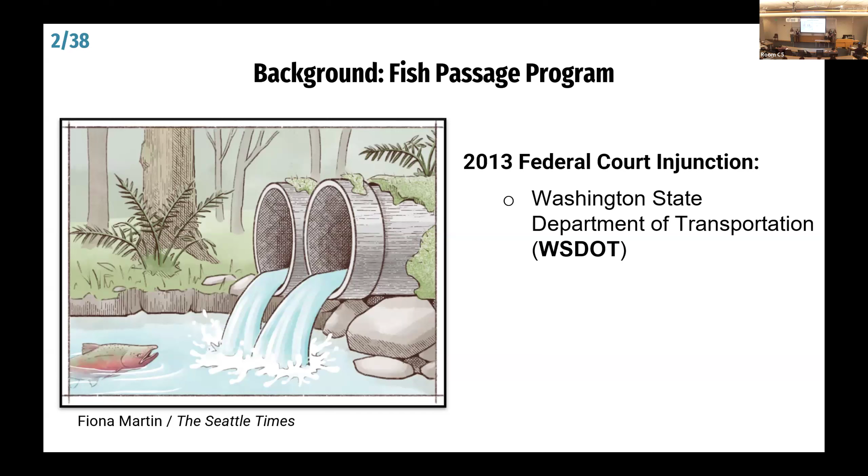A federal judge agreed with the tribes, and as such, state agencies such as the Washington State Department of Transportation are responsible for correcting these barriers caused by their infrastructure.

Although King County does not fall under that state agency umbrella, they are taking a proactive approach. They have developed a fish passage inventory that categorizes fish passage blockages by how much habitat would be opened up if corrected. This has led to 60 high priority barriers that, if corrected, would open up over 300 miles of habitat for salmon.

As for our specific project, we are working on a culvert in South King County, right next to Enumclaw, Washington. The culvert runs next to State Route 410 and underneath the Foothills Trail, which runs parallel to Boise Creek. Our culvert allows our tributary to pass underneath the Foothills Trail into Boise Creek.

A little site history, because it's relevant for our project as a fish passage project: our tributary actually runs in the channel where Boise Creek used to run. But in the early 1900s, when they were constructing the railroad and State Route 410, Boise Creek was straightened and moved to run between those two raised roadways.

As a result, you get a channel that would naturally be moving and have diversity in velocity and water depth, depending on where you are in the stream, turned into a channel that's straightened and more artificial. This has a lot of impacts on fish habitat, especially salmon habitat, because a naturally meandering stream would typically have areas of lower velocity that serve as refuge for juvenile salmon. Creating an artificial straightened channel loses a lot of those habitat complexity features.

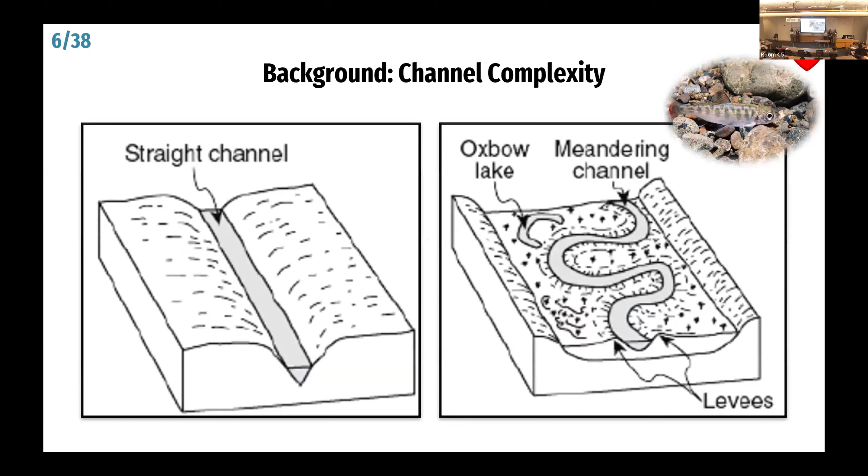We had the opportunity to do a site visit this past fall, and it really came down to three main reasons why this culvert is not fish passable.

The first reason is that it's a perched culvert. When we went out for our field visit, we measured the distance from the bottom of the outlet to the top of the water surface, and it was about 1.3 feet.

The second reason is that it has a very high slope. From the inlet to the outlet, it's about a 4.7% slope, which leads to really fast velocities going through our culvert. The third reason is that the outlet comes out into a really shallow part of the stream, so the fish jumping mechanics from the shallow stream bed up into the culvert is really challenging.

Going back into our model location, we decided to model this specific portion of the stream, which you'll see in our HEC-RAS model right here.

You may notice that our stream is at the downstream-most section because the flow travels south in that direction. You may also be seeing a little gray box right around here.

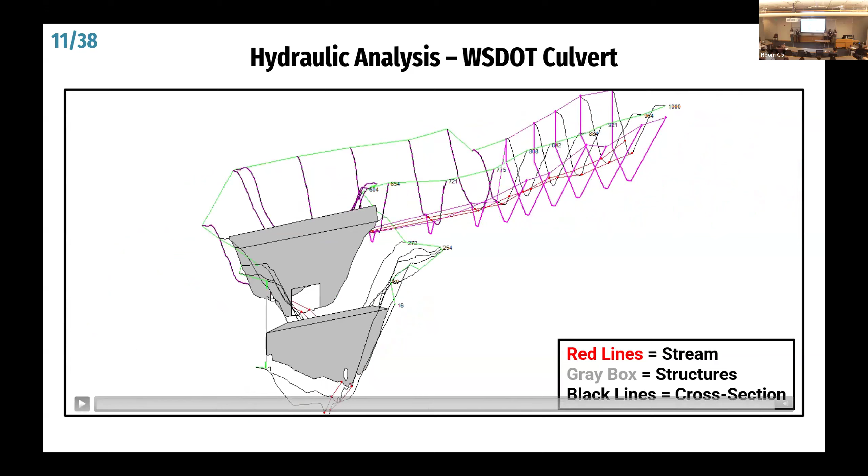All those cross sections are doing are just making cuts along the stream so that we know how the stream bed looks throughout the channel, and that way when we run the model through it, we know how the water is going through it.

You can see WSDOT just upstream of ours.

In order to do our designs, we had to take a bankfull width measurement, which is the width of the bank when the bank is full. That's really important for us because anything we design is going to affect how the water flows through it.

In that case, we need to make sure the bankfull width is wide enough to facilitate those high flows. So when we went onto the site, we got a bankfull width measurement of around 5.1 feet.

But we upgraded that to around 18 feet, which may seem a bit high, but that actually takes into account a lot of climate change that will happen in the future, and also tribe preferences.

So we have our fish passage program background, our problem statement, our bankfull width, and some site history. The last thing we need to finish our model is to actually figure out how much water is going through our culvert.

As you can see on this slide, in blue over here is a basin delineation which WSDOT performed. We were lucky enough to have access to that information, so they performed a basin delineation and calculated flows.

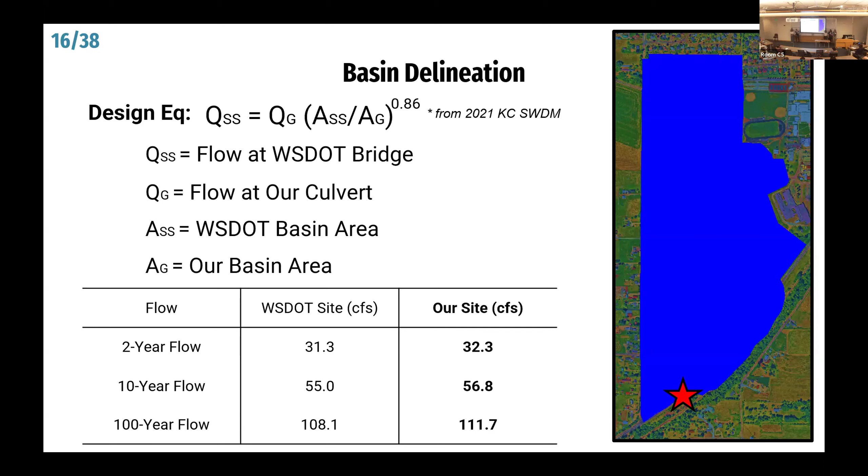So to address this, we proposed 3 alternatives to our liaisons at King County: a pipe arch, a bridge, and a box culvert.

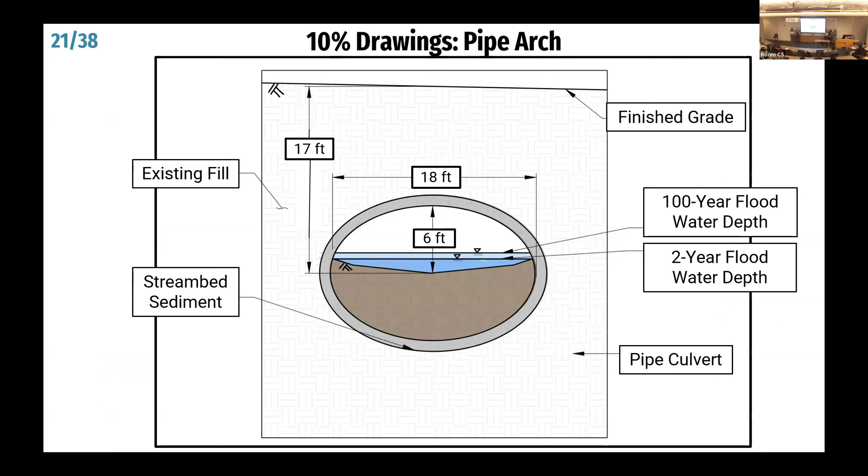The first alternative was the pipe arch, a concrete pipe arch. Here you can see our 10% conceptual design. Note the 18-foot width to accommodate the bankfull width we calculated, and the 6-foot height from the stream bed to the top of the structure to give sufficient freeboard during the 100-year flow.

The great thing about having our HEC-RAS model is once developed for our stream, we can put in proposed structures where our current culvert is. This shows how the flows would move through a structure with those dimensions if we were to construct it. Here's our pipe arch, showing the water surface elevation for that 100-year flow.

Finally, we have our 4-sided concrete box culvert. Here are the HEC-RAS results. We actually used an 18-foot width for this, similar to the pipe arch instead of the 20-foot bridge.

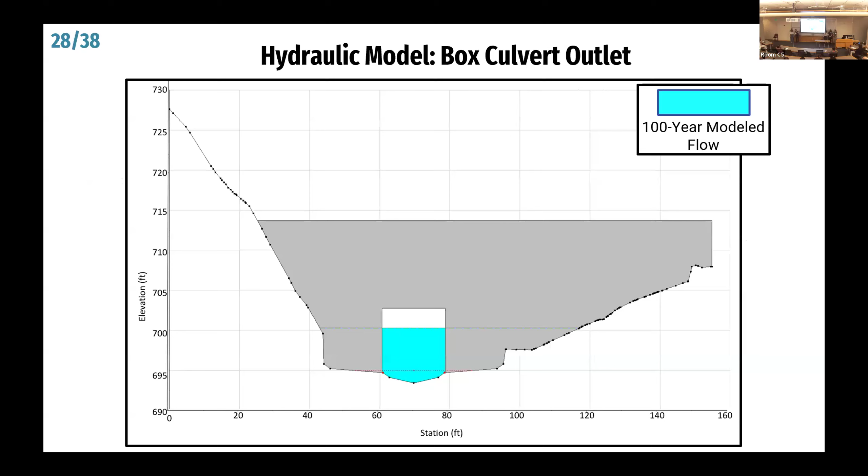Once we had those 3 alternatives developed, we wanted to evaluate them using an evaluation matrix. We took 9 different categories that were relevant priorities for our project and weighted them based on importance. Then we scored all 3 alternatives both qualitatively and quantitatively, as well as an as-is option to give us a baseline.

When we did this, we found that the box culvert and the bridge came out ahead with very similar scores. The box culvert came in just a few points ahead of the bridge, so we went to King County to discuss.

While the box culvert and the bridge had very similar results, we chose the box culvert. The reasoning is largely certainty within the cost estimate. While both alternatives require structural analysis, there hasn't been a geotechnical analysis completed at the site, so there's a lot of variability, for example within the foundation design and structural design, and the bridge would have more variability than the box culvert. Since there's more uncertainty there, we went with the box culvert.

With that decision, we're able to move on with our 30% design. On screen you can see the existing plan, and one thing to note here is this temporary stream diversion.

You may be wondering, what is a temporary stream diversion? When you're doing construction in a stream, you need to get that water out so construction workers don't have to get wet, because it wouldn't be very fun for them. However, this is a fish passage stream, so you may be wondering, what happens to the fish?

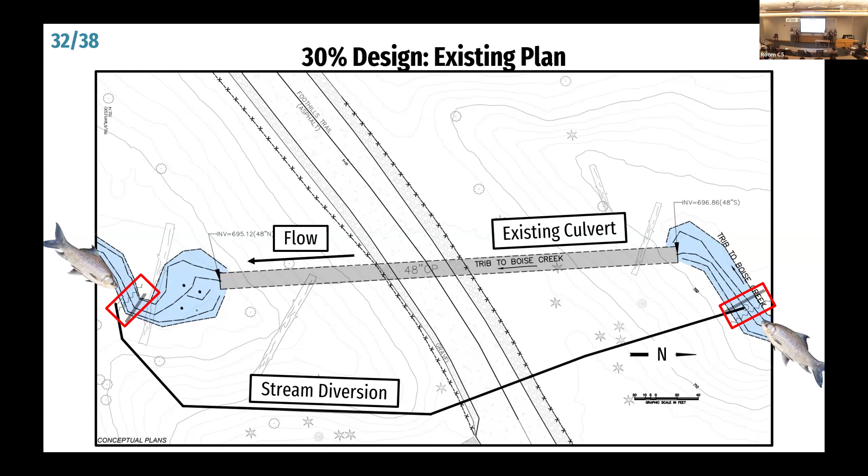Pretty much, we just put up nets, so they can't get sucked up into the pipe, since they wouldn't like that. They hang out there for the duration of construction, which likely won't be very long.

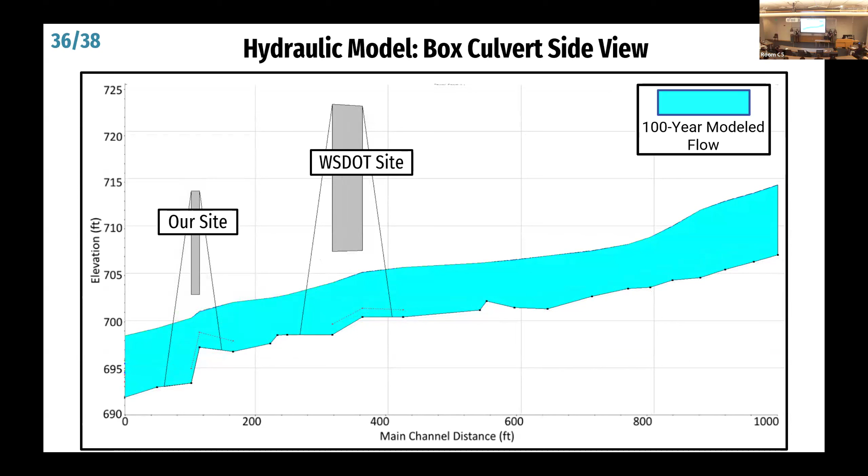So now returning to our hydraulic model, we can really see how the flows would be affected by this new structure. Here is the side view of our proposed conditions. Once again, you can see those two hydraulic drops. When we transition to the structure with the wider width, those two drops disappear and the flow moves much smoother through the culvert.

Thank you so much. Any questions? You can just put up your hands.

I have a quick question regarding opportunities for collaboration between King County and WSDOT. You mentioned they had another project going on very close to your site. Was this something you saw as a key challenge in your project? I know you had to consider a lot of the implications of their project in what you were conducting. Did you see an opportunity to collaborate with them, or are you just curious if you think that?

So your question was whether we were able to use this project as an opportunity to collaborate with WSDOT, since their project was right upstream from ours. We saw it as a really great opportunity and a benefit to us, because they had already completed their report for their preliminary hydraulic design. There was actually a lot of really helpful information about our tributary in that report. King County was also in communication with WSDOT, so we got some information from them that we couldn't have gotten otherwise. It was really helpful to have that as a resource for us.

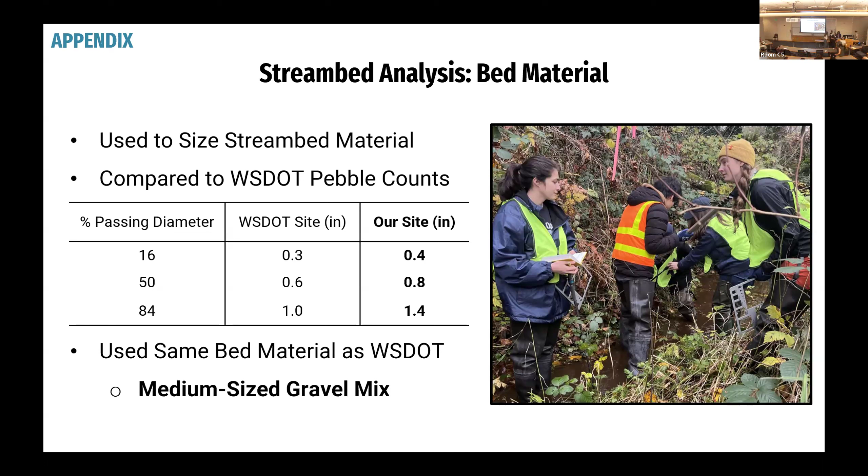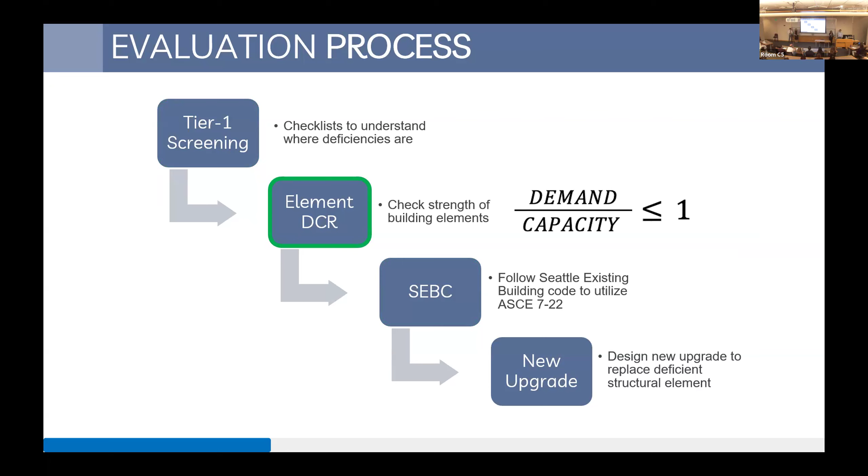We also learned that under the Seattle existing building code, we are permitted to use different design standards apart from ASCE 41. Therefore, our team utilized the ASCE 7-22 standards to design the final upgrades for each building within our scope.

To elaborate more on what our team did during the Tier 1 screening process, we completed a series of checklists designed for different performance levels, such as immediate occupancy and life safety. Both of these performance levels ensure that the North Service Center sustains minimal damage during an earthquake, while protecting occupants inside and outside of the building and remains fully functional immediately afterwards.

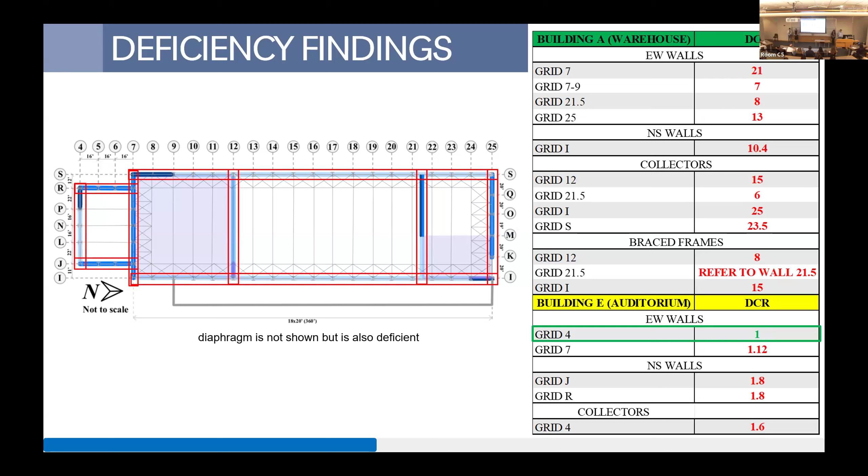Diving deeper into the areas of concern in the auditorium, Team CE 25.5 has identified significant deficiencies within the lateral support system. This includes in-plane and out-of-plane seismic forces acting on the existing shear walls. Currently, there are only 2 shear walls within the auditorium, one on the south wall and one on the west wall. The south shear wall is made up of reinforced concrete and has a demand versus capacity ratio of 1, making this wall compliant. In contrast, the west shear wall is made up of CMU, which stands for concrete masonry units, and has a demand versus capacity ratio of 1.8, making this wall insufficient and will likely be compromised during a seismic event.

Now I'll pass it back to Paula, who will describe a deficiency within the warehouse. Thanks, Elaine. In the event of an earthquake going in the east-west direction, the shear wall at grid 7 is subjected to seismic forces from both buildings. Given the extensive tributary width coming from the warehouse, the shear walls at grid 7 and grid 25 may not provide sufficient lateral resistance. To address this deficiency, our team has developed an upgrade to propose to Seattle City Light, which we will introduce later in the following slides.

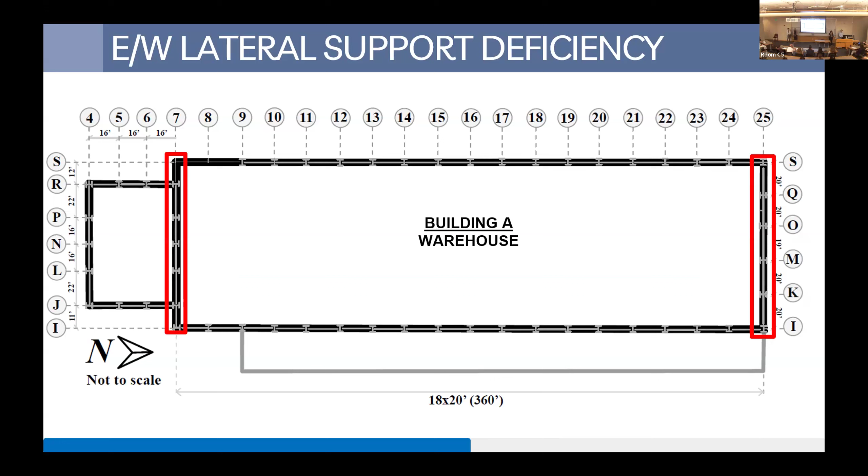But for now, I'm going to pass it to Harold to share another deficiency we found at the warehouse. Thank you, Paula. Continuing the conversation on the warehouse, our team identified two major deficiencies in the diaphragm. For clarification, a diaphragm is a structural component which is part of a building, which can either be the roof or floor system.

In the case of our warehouse, we analyzed the steel deck diaphragm, which is our roof system. The first major deficiency our team identified is insufficient welds. From our site visit and the building plans, we found the existing welds from the decking to the trusses, and the longitudinal seam welds, to be insufficient from our analysis and inspection. In general, these welds transfer forces and help connect existing members.

Thank you, Harold. Once the team was able to understand all of the deficiencies throughout the North Service Center, the originally proposed approach of utilizing ASCE 41-23 to conduct a retrofit appeared problematic. The associated costs and level of effort required to follow this method greatly exceeded our initial expectations. To lower these costs and maintain project efficiencies, the team wanted to explore alternative methods.

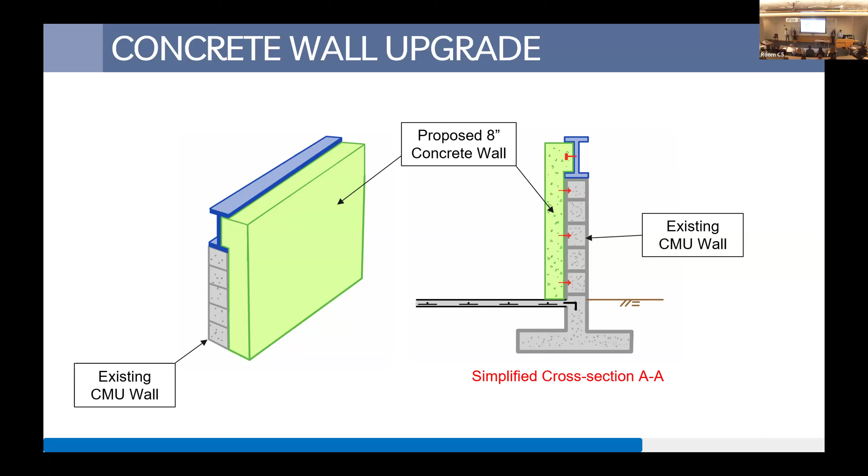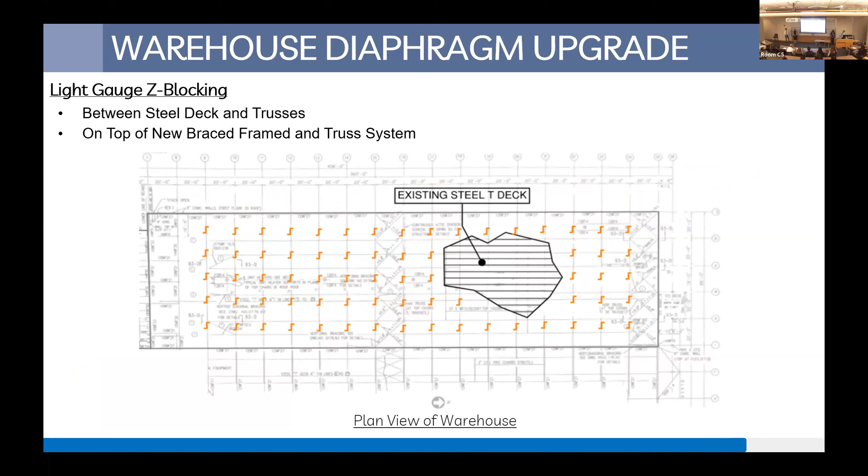I'm going to pass it to Harold to share another upgrade for the warehouse. Thank you, Paula. One of the major upgrades the team proposed for the diaphragm of the warehouse is the addition of light gauge Z blocking. As I mentioned earlier, shear transfer and insufficient walls are issues that need to be addressed. The proposed upgrade, shown in orange, will be located between the existing decking and trusses, and also at the proposed new truss and brace frame configuration that Paula just mentioned.

The connection is as follows: the top of the Z blockings will be drilled underneath the steel deck with Tek screws, and the bottom of the Z blockings will be connected with powder actuated fasteners to the top chord of the existing trusses. The proposed upgrade improves the connection and allows lateral forces to effectively transfer from the decking to the overall lateral resisting elements, which leads me to the full breakdown of all our proposed upgrades for both the warehouse and auditorium.

To further quantify each upgrade, here are all of our concrete upgrades. Following all the concrete, here are all of our diaphragm upgrades, which include Tek screws, Z blocking, and C channels. And finally, here are all of our steel upgrades, which include brace frames with dampers and ones without.

All of these upgrades follow the general procedure of doing a tier 1 screening process, a DCR analysis using ASCE 41, the use of FEMA to better understand the seismic behavior of a rigid wall flexible diaphragm, and finally using ASCE 7 for our proposed upgrades. I'm passing it on to Helene, who will finish talking about the cost estimate of this project.

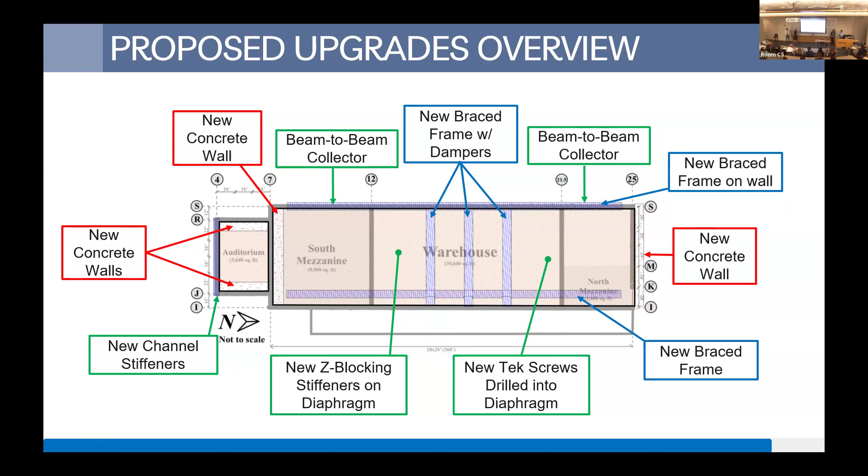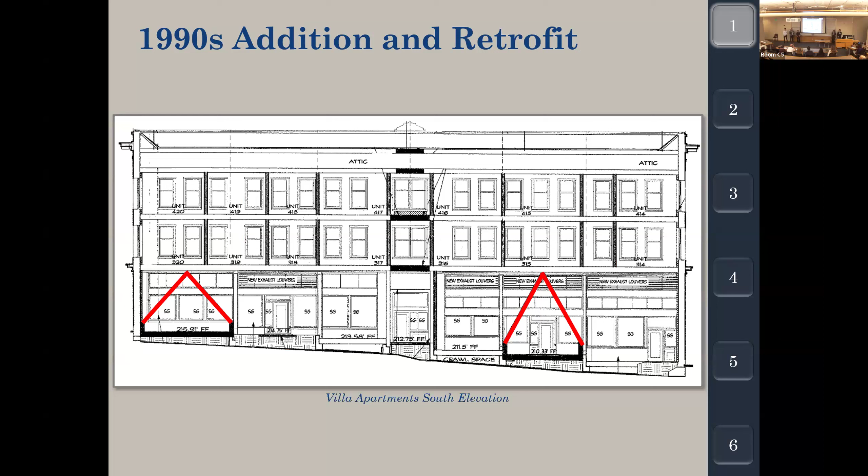In the 1990s, our building got a major addition added on, outlined in red here. It was not part of our project since it's seismically separated from the rest of the building. Alongside this addition, we also had some seismic renovations done, including the addition of two chevron brace frames, as well as wall anchorage and parapet fixing. Now I'll pass it back to Nick to go over our retrofit methods.

Before diving into the specific calculations and design work our team performed, it's important to understand the scale of this problem. The city of Seattle alone has over 1,100 unreinforced masonry buildings, all at risk of damage during a seismic event. Because of this, in 2024 the city of Seattle passed Resolution 32033, which created a program to incentivize the retrofitting of unreinforced masonry buildings.

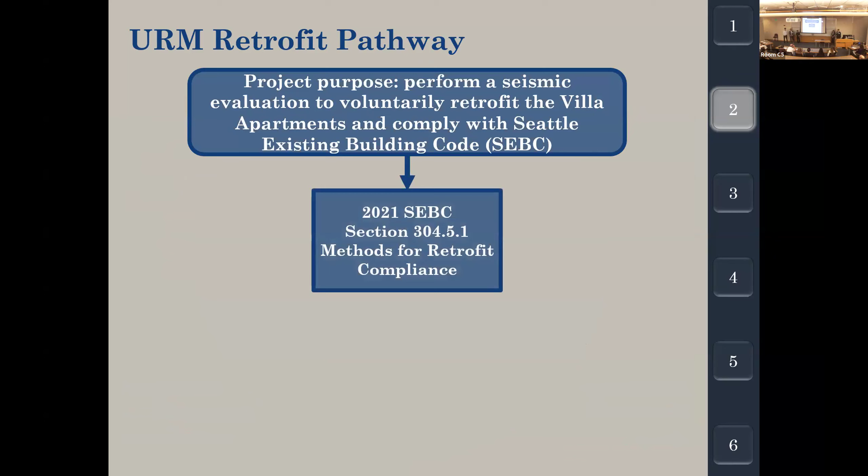Generally speaking, when you retrofit an unreinforced masonry building, you protect life safety, preserve historical landmarks, minimize financial strain on communities like those in our apartments, and improve earthquake resilience. For our project specifically, the purpose is to perform a seismic evaluation to voluntarily retrofit the Villa Apartments and comply with Seattle Existing Building Code. This led us to use the 2021 Seattle Existing Building Code, Section 304.5.1 methods for retrofit compliance.

Within these methods there are three sub-items, as seen on the screen. Initially our team looked into item 3, for existing retrofits, where we aimed to qualify the 1990s retrofits as acceptable in today's standards. However, we determined that they were not feasible. Then we looked into item 1, Section 304.4.2, the reduced IBC method, which is a full life safety upgrade of the building. We determined this was too expensive for our client and not feasible. This led us to pursue item 2, the Chapter A6 alternate method.

Chapter A6 is a retrofit method specifically for unreinforced masonry buildings, and this allows us to remain cost-effective by minimizing the required life safety upgrades. This is especially important for us because it allows us to find a design solution that aligns most with our client's goals: remaining cost-effective, limiting tenant displacement to under 12 months, and minimizing the amount of invasive structural replacement. Now I'll pass it to Keon to talk about our first steps.

As Shay and Nick just mentioned, the most preferable retrofit pathway is the alternate method. But before we could begin the qualification process, we had to assess aspects specific to our building, starting with a material analysis, giving us our seismic weight, alongside determining the seismic hazard, giving us the shear forces, both of which were necessary before any further evaluation.

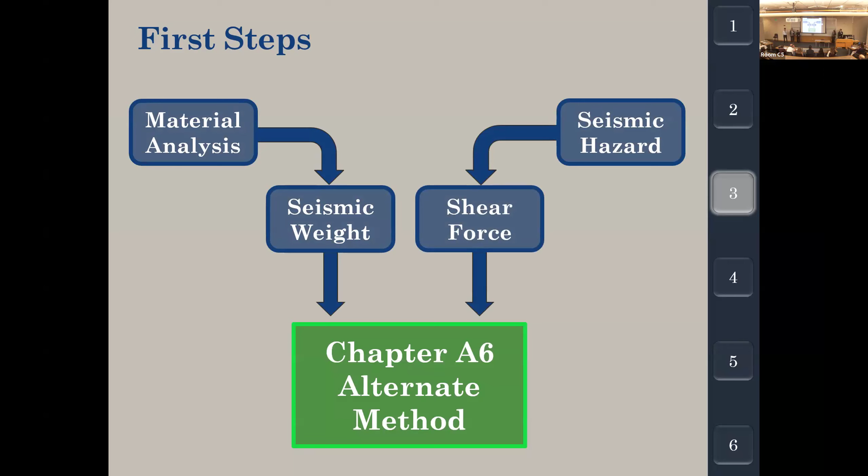So we took those materials and found their unit weights using the appendix of ASCE 7-16, alongside previous projects and other online resources. Now looking at the seismic weight using those unit weights.

For the seismic hazard analysis, we used the ASCE 7-16 hazard tool to get our key seismic design coefficients using soil type C. Since we do not have an official geotech report, our team prescribes that a geotech investigation be done for our site. Since this is also an existing building, Chapter A6 allows us to reduce our seismic forces to 75%. This helped us get started on the building demand calculations: the wall story force and shear.

The wall story forces were calculated for each wall corresponding to each seismic level. To get the wall story shear, we just summed up all the wall story forces at each level. Next, I'll pass it on to Shay, who will be talking about the A6 qualification criteria.

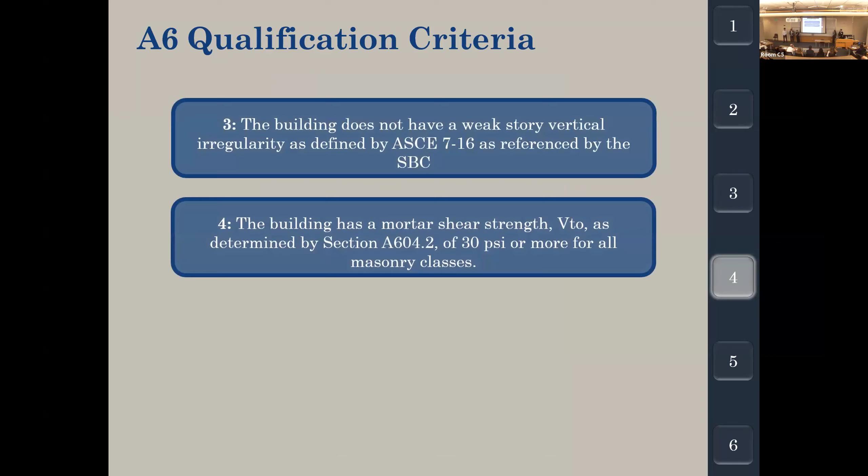A6 provides us with 7 criteria which we must meet in order to retrofit the villa apartments per this method. Of the 7 criteria, criteria 3, 4, and 7 required a bit more work. Criteria 3 has to do with the weak story vertical irregularity in the commercial space of our building. Criteria 4 has to do with the mortar shear strength, which will require out-of-scope testing. Criteria 7 has to do with the way that our masonry walls are responding to seismic forces.

After doing these calculations, we found that we did not meet that 40% rule, thus leading us into our exception. Our exception had us do a masonry analysis via Appendix A1 Special Procedures, in which our first step was to determine which pier failure mode controlled at each level on each side of the building.

The first pier failure mode is sliding failure, which occurs when the lateral forces exceed the frictional resistance built between the brick and the mortar, causing sections of brick to slide against each other like this. The next type of failure was rocking failure, which occurs when the overturning moment from the lateral forces exceeds the self-weight of the building, causing sections of brick to tip back and forth along a single axis like this.

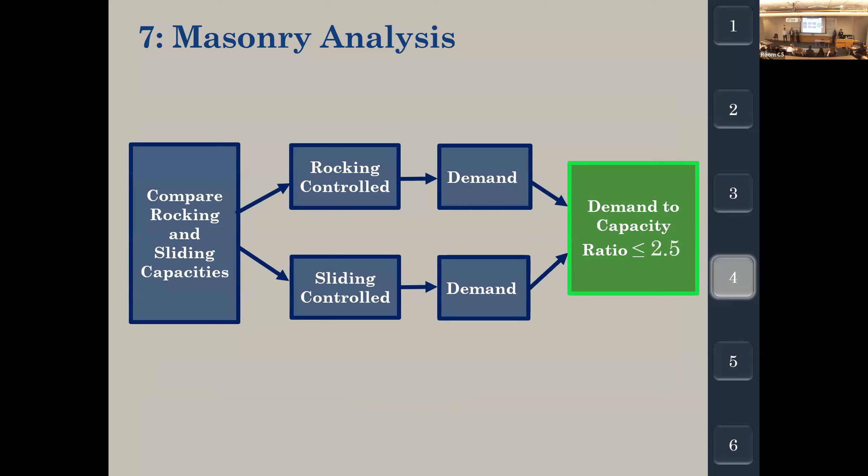Once we figured out which pier failure mode controlled, we were able to use the correct demand and capacity equations. Something important to note here is that A6 allows us to have a demand-to-capacity ratio of up to 2.5, whereas the industry standard is typically 1. This means that our demand can be up to 2.5 times our capacity.

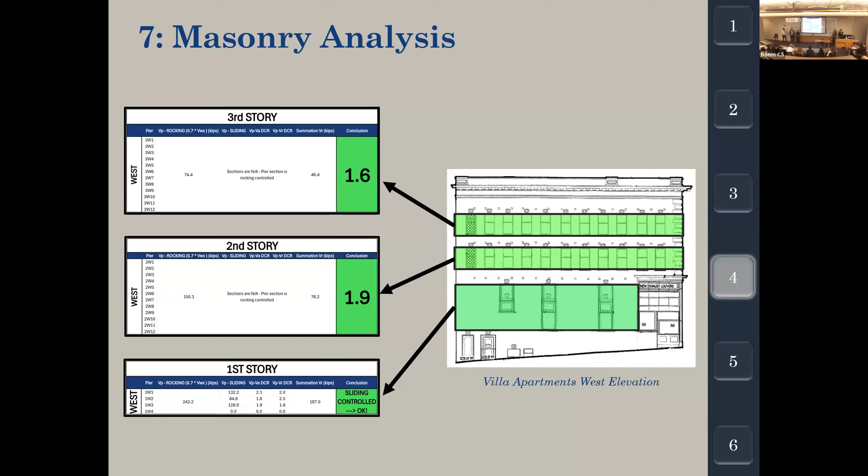Our job was to ensure that these piers could withstand the high demands, and we concluded through our analysis that all pier sections on all four sides of the building were within the 2.5 demand capacity ratio provided by the alternate method, thus concluding our criteria number 7 analysis.

As Shay mentioned earlier, criteria number 3 has to do with a weak story vertical irregularity. Our team determined that the Villa Apartments has a weak story vertical irregularity in the window wall on the south-facing first floor, because the window walls have less strength or stiffness than the masonry walls above them. To analyze this, our team looked at the drift and strength capacities of the wall. Drift is how much the wall moves side to side during an earthquake, and strength is how the wall reacts to seismic forces.

Because the Villa Apartments currently has chevron braces on the south wall installed in the 1990s, our team analyzed these first for their drift and strength capacities and determined that they were both inadequate. As such, we recommend installing new buckling restrained brace frames to make the window wall adequate and remove it from being a weak story vertical irregularity.

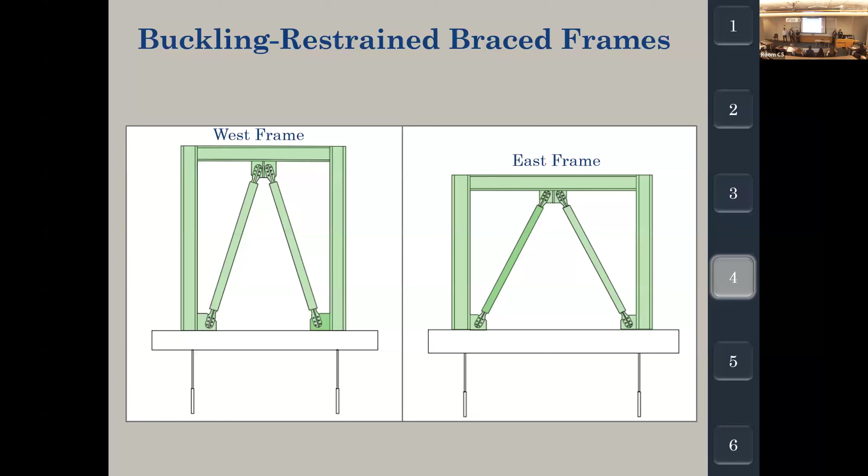We determined that the system was adequate in both drift and strength, which allowed us to finalize our design, as seen above, with accurate member sizes for the beams, columns, and braces, as well as our tentative foundation below. Because the system is adequate in drift and strength, this allowed us to check off criteria number 3 and move into the seismic improvement methods, which Will is going to discuss next.

So the first seismic improvement element outlined by A6 is out-of-plane wall bracing. This is basically used to prevent the walls from collapsing between floors, and can implement use of the bracing shown on the right here.

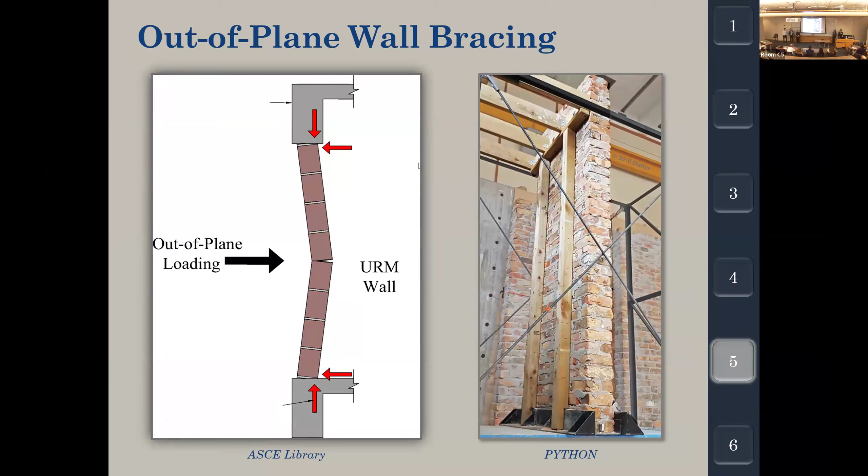Next is the seismic improvement element outlined by A6: wall anchorage. Wall anchorage is basically used to tie the floors to the walls, preventing them from completely separating and collapsing in a seismic event. To evaluate these wall anchors, since they were part of the '98 retrofit, we had to evaluate them for both shear and tension, or in-plane and out-of-plane forces.

Additionally, where we cannot install new anchors, we have to recommend special lateral bracing for areas like the stairway and the elevator shaft.

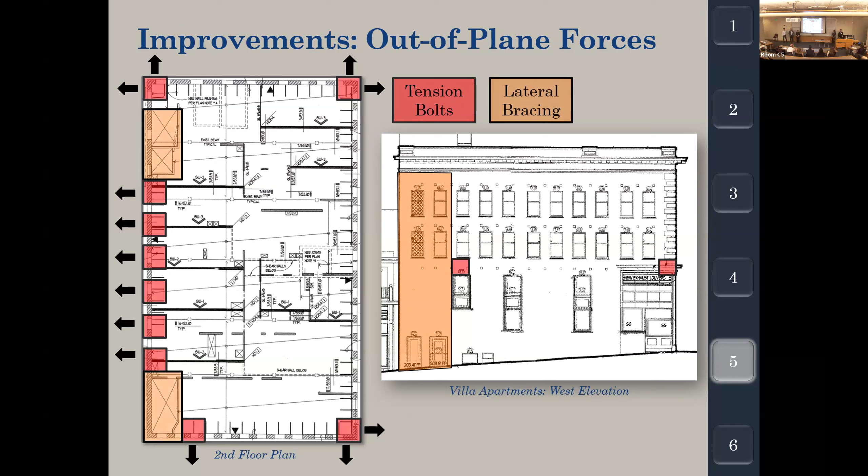Moving into our cost estimate, we broke our cost estimate up into 4 categories: 1 being design fees, 2 being Chapter A6 qualification requirements, 3 seismic improvement methods, and 4 our contingency and overhead. Overall, our total project cost came out to $1.1 million.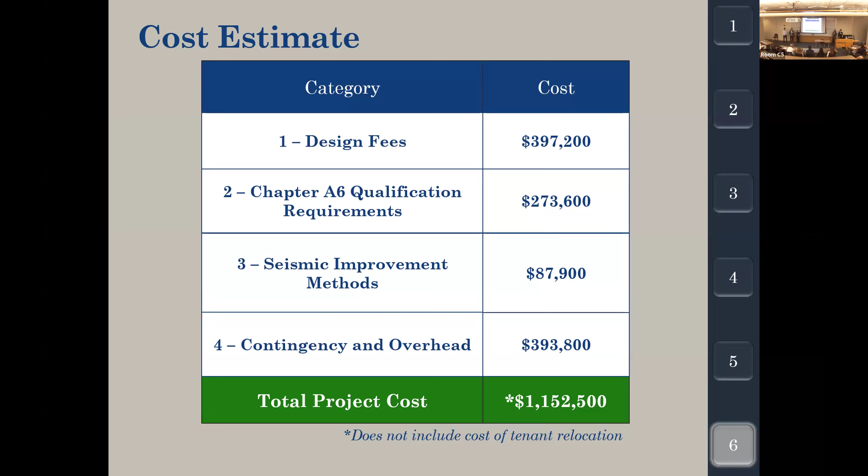Something important to keep in mind here is that A6 is the most cost-effective method in comparison to other retrofit methods, such as substantial alterations. Thus, we believe that our design solutions are most in line with our sponsors' goals. Thank you.

Awesome presentation. Just had a quick question. As a former dirt guy myself, what led you to choose site class C versus site class D, since site class D would give you guys a little more conservative values?

So I'll repeat the question. The question that was asked is, why did we choose site class C? Is that correct? Well, we do not have an official geotech report, like mentioned, so we had to use existing boring logs through our Washington Geological Portal with the advice of a senior geotech from a different company. We were able to look at the soils and came up with the idea that it is soil type C, so we're just basing it off of that. I did repeat that we are recommending a geotech investigation be done for our site, which will also be useful for our finalized foundation design.

Can you explain why you're allowed to get to 250% of your, you can have your demand be 250% more than your capacity, and also how you feel about that?

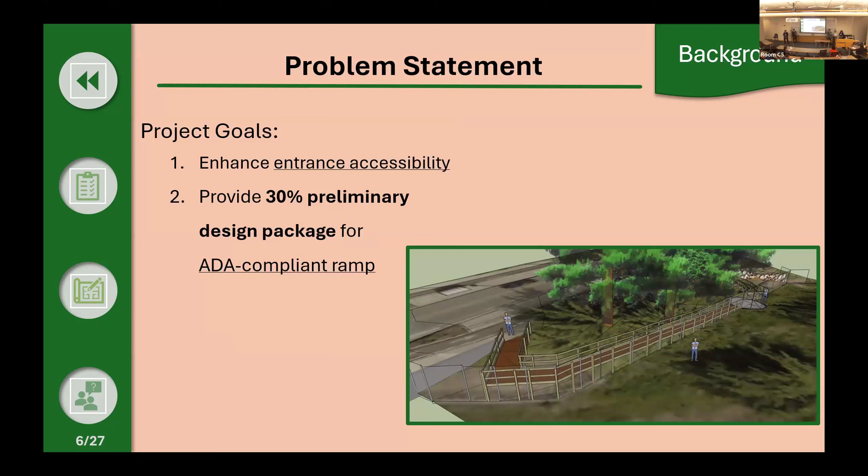This leads into our problem statement. Due to the inaccessibility, we've been tasked with designing an accessible ramp for Yes Farm, and we've created a 30% design package as well as a cost estimate.

Some of our design challenges are the trees—there are five large trees located on site, so we don't want to inhibit their roots or health. Also, as mentioned before, the slope of the site is currently a 20 to 25% grade, and for ADA compliance we want to get that down to 8.33%.

Lastly, we have right of way issues. Our site will be located here, highlighted in orange. This area is owned by the Seattle Department of Transportation, whereas the remainder of the farm, highlighted in blue, is owned by the Washington State Department of Transportation.

Here's a drone video highlighting the site. As you look at the model being handed around, if you want a bigger, larger scale model, you can check us out outside. And don't let these images fool you—during our very first site visit, one of us literally fell victim to this slope.

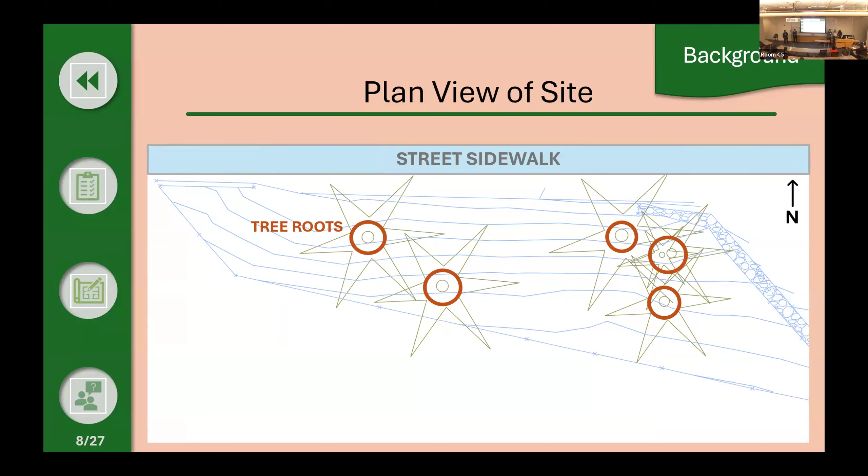For another visual, here is a topographic plan view of the site. Starting from the north, we have the sidewalk along Yesler Way. Then we have the tree roots circled, and the stone wall on the east side. At the bottom, there's the farm entrance, fencing line, and the garden.

As stated in the problem statement, the garden will be part of the WSDOT property, and anything above the fencing will be SDOT property.

So for our deliverable, we have our site plan, which consists of four big parts: our vicinity map, our temporary erosion control plan, tree protection plan, and our ramp drawings.

We will also be implementing the CSI specifications as part of our deliverables. CSI stands for the Construction Specifications Institute, and it's basically an easy reference document of construction details for future contractors working on this project. We also have a copy over at our station.

We will also be doing a cost estimate, which breaks down the cost for each item, and we'll break that down further later on in the presentation.

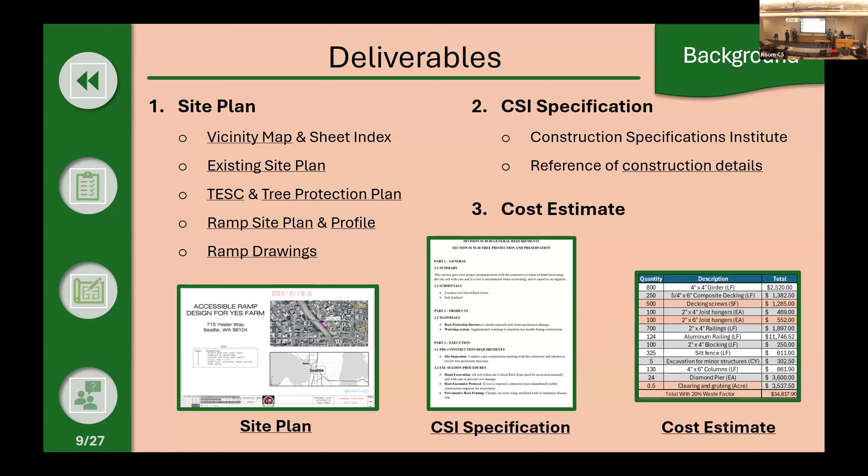Moving on to minimum requirements. As Alana mentioned earlier, we will need a tree protection plan. So we've identified the critical root areas using the Seattle Standard Plan number 133 to identify the 3 main critical root areas. Firstly, in zone A, highlighted in red, this is the most critical area, and to be able to build here, a site visit and vegetation protection plan will be needed.

Following that, highlighted in green, this is zone B. This is a somewhat critical area, and the approval of a minimal disturbance plan will be needed. Lastly, outside of that is zone C. This is the least critical area, and the approval of construction plans will be needed.

Overall, by identifying all these critical root areas, we used this to determine where to put and space our piers, which is what we'll explain now.

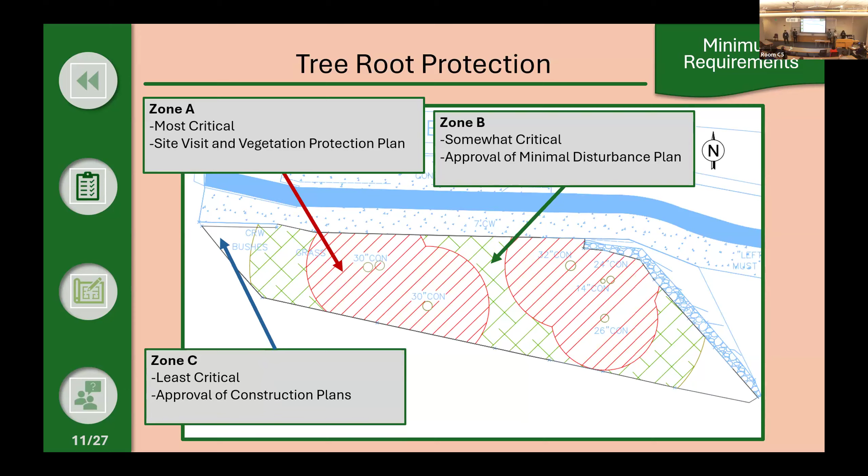As Nathaniel noted, our site is full of critical root zones, and we're going to be butting up really close to a couple of those trees. So we looked at other sites and other projects that had a similar problem of foundations needing to be placed really close to trees like this. This also happens to be a KPFF project up the shoreline, and they ended up using these diamond piers.

Diamond piers are great for the applications we're using right now, because when they are placed, they aren't like a usual foundation system where you dig a hole and put a big block of concrete. It is a pin-driven foundation system, meaning that when the piers are being installed, they can be angled and rotated and moved so that the pins don't hit those roots that we want to avoid and don't disturb those trees.

But in order to build with diamond piers, we have to have some idea of the type of soil we're working with. Luckily we turned to the Washington Department of Natural Resources, which collects a lot of publicly accessible soil data for sites all over the city.

While we didn't have a borehole that was publicly logged on our site, we took borehole data from sites around us and put together a couple of models that estimated what sort of soil conditions we should be looking at on our site. What we ended up concluding is that we were expecting a sand and gravel mix soil for our topsoil, where the diamond piers would be placed.

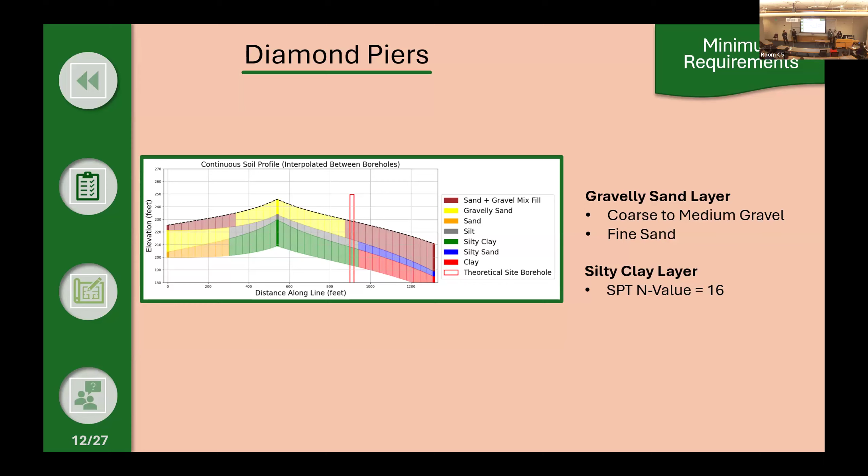This was later confirmed when we were shown pictures of previous excavation at our site that seemed to reveal a gravelly sand layer. That's actually ideal and perfect for diamond piers, as that's the preferred type of soil that diamond piers call for.

Moving on to the design consideration for stormwater. According to our stormwater code, we have to turn in something called a temporary erosion control plan. What is that? It's basically a plan that stops dirt from washing away. There are two parts to that plan.

One is the narrative part, the written part, saying what types of tools we need to use to stop this runoff. Then we have our site drawings, which are like a map or diagram to show where we implement these tools.

According to the stormwater code, our project is considered a trail project. This means that we do not need an on-site stormwater management plan, and we also do not need a soil infiltration plan.

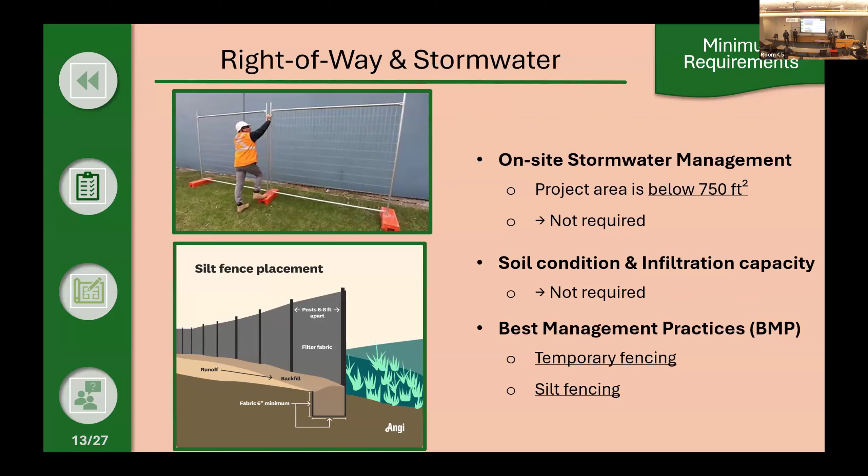The tools I talked about earlier are called best management practices. We'll be using silt fencing, shown in this picture at the bottom of our site, and temporary fencing.

Moving on to design for the ramp, we have to design it according to ADA guidelines to make it accessible for everyone. This includes a 1:12 slope and handrails on both sides, and for every 30 inches of rise there should be a level landing, with the landing being 60 inches by 60 inches.

Based on what Alana said about the standards, our team came up with a couple of iterations for ramp paths, and ultimately we chose this ramp path starting from the left side of the sidewalk, sloping down to the farm entrance. Considerations included ADA compliance of an 8.33 maximum grade, also known as the 1-12 slope, and following the minimum landing width of 60 inches by 60 inches.

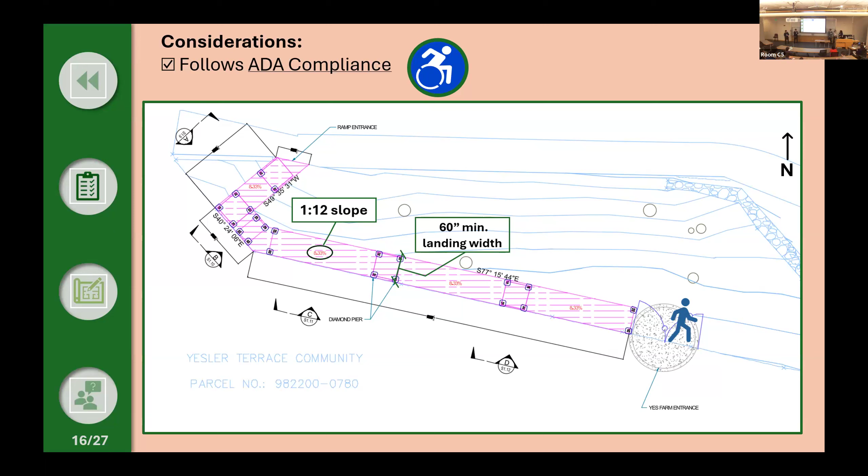One more thing, as Daniel mentioned earlier with the critical root zones, we're trying to avoid any of the tree roots to promote sustainability.

Moving on to our design process. Before we move on, I want to point out this long section that was part of our design process, and part of the path we chose was that we wanted to avoid putting piers next to that tree. That'll come into play when we talk about the design process of the structure.

Additionally, we make sure to include aluminum ramp treads on the surface of our decking to ensure a non-slip surface, which is part of our accessibility goals. We also use Simpson Strong Tie connections to keep our wooden members together.

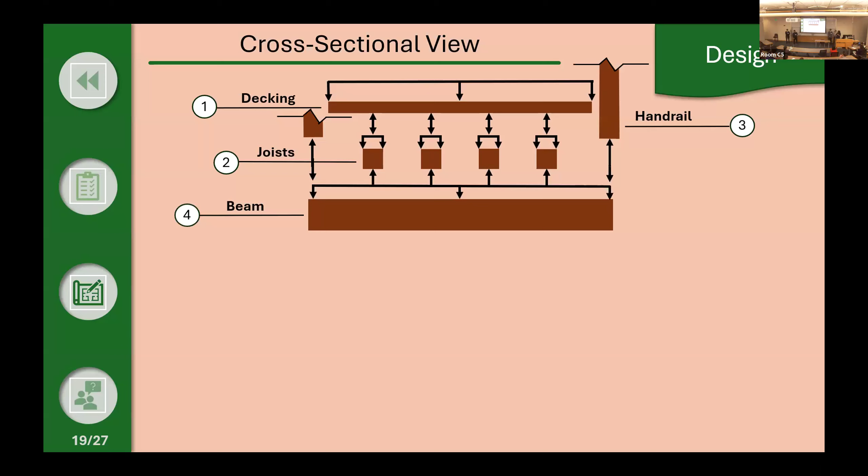The idea behind the loading path of this structure is that most of the loading goes in through the decking, where people walk and where we expect most of the live loading. That gets transferred down into our joists. Also, a lot of lateral and vertical loading is seen through the handrails. Both the decking and handrail loads are passed into the beam that holds both up, down through the pillars holding the beam, into our diamond piers, and finally into the ground.

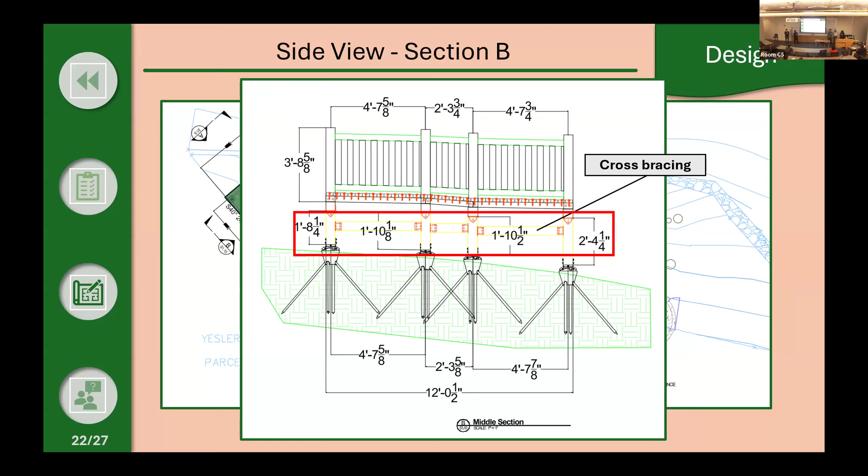Next, we broke it down into the second section. Here you notice there's cross bracing — this is where we want to make sure those lateral loads are handled. Also notice the diamond piers and the ground surface again on this one.

Then this long section, I had to break down into 2 different sections. Sorry, technical difficulties — I got it.

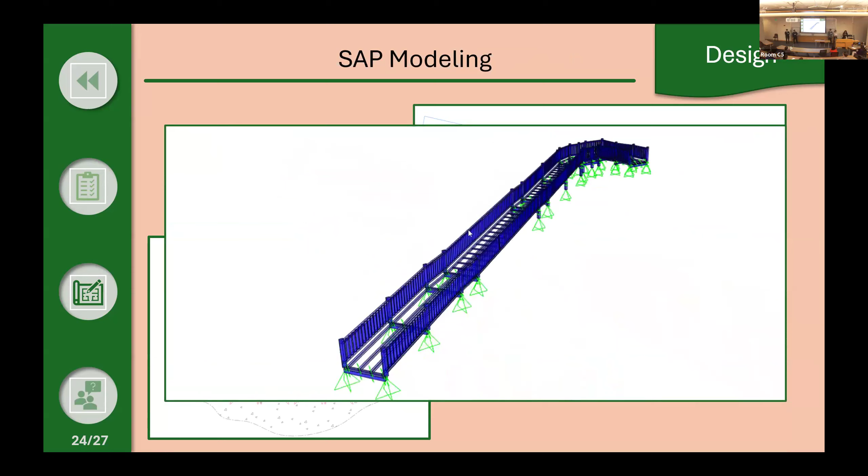In order to make sure our structure was structurally sound, we took our designs and made a 1-to-1 scale 3D model of our ramp in SAP 2000, a structural analysis modeling software. We applied the loads we need to design for according to the Seattle Building Code: 60 pounds per square foot on the decking and 50 pounds per linear foot along the handrails.

What the SAP model helped us do is output the stresses that each member is expecting to see. We went through and input all of these into an Excel sheet that went member by member, and also took the demand capacity that we now know from our SAP model, and we had to find our stress capacity.

In order to find stress capacities for our timber members, we consulted the American Wood Council's National Design Specifications, which lays out the process for outlining how each member is being used, the length of it, and the environment that it's being used in, giving us a stress capacity for that specific member.

We automated this process using an Excel sheet for all 650 something members, comparing the demand stresses from our SAP model to the capacity stresses from the American Wood Council's NDS. We got a super long Excel sheet with over 600 entries, and made a summary sheet which summarizes the highest DCRs that our members see. A couple of these were expected, a couple were unexpected.

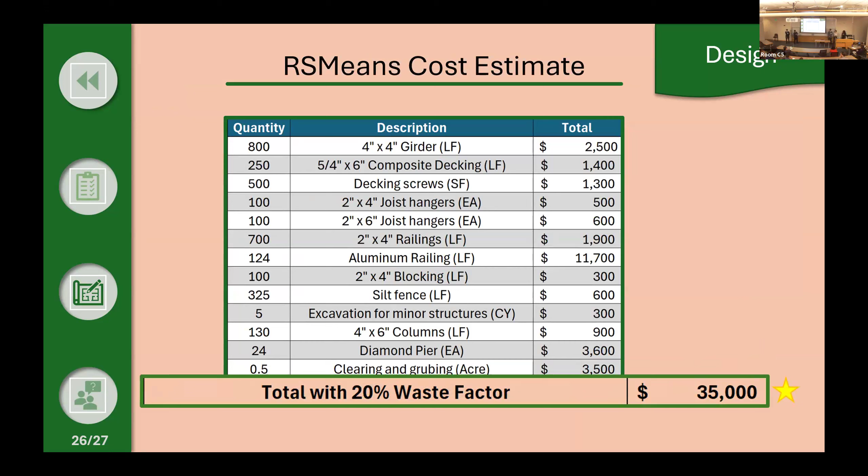Then we took all of these different deliverables and put them all into our report. We're going to give these to KPFF and the Black Farmers Collective, and they will then move forward with the project and hopefully build it. Any questions? Thank you.

Thank you all for your patience and for letting us fire that information at you. It was a pretty big project, a pretty big scope. So yeah, any questions?

With all the standards and specifications that you have to work with on your project, do you have any opportunity to be innovative?

So the question was whether we could be innovative on our project. One of the things when we were talking to the Black Farmers Collective is they wanted to keep it aesthetic, so we stuck with wood as it was a better aesthetic. We did look at other options, but it was one of the things that aligned with our project. That's one of the reasons why we stuck with that.

The thing that we did figure out, we knew, was those diamond piers - those were new to all of us. So that was kind of our innovation. We didn't know about diamond piers before this project.

It's kind of hard not to have to innovate when you're stuck with a site that presents a lot of challenges like that, because we have that section where we get really close to the trees. So there was a lot of innovation needed to figure out what type of foundation systems we're using, the sort of connections we're using, and how we expect that long section to perform.

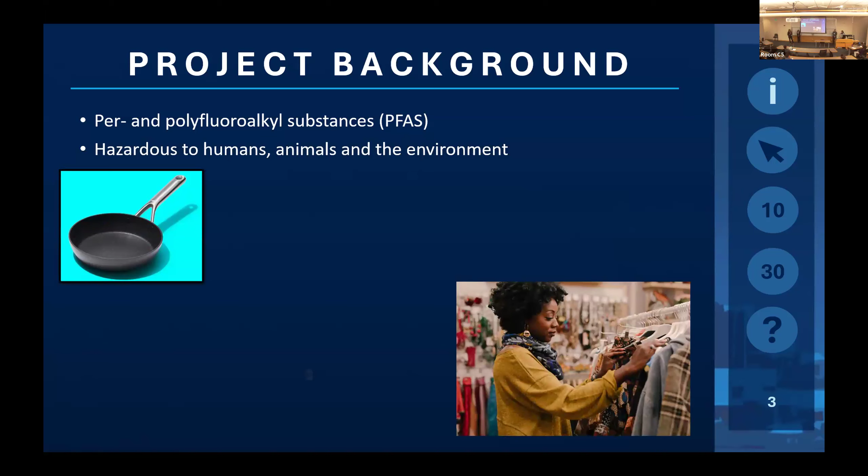So we're going to try to remediate that. It's in lots of different things: it's in your nonstick pans, your clothes, firefighting foam. The problem is it's known as a forever chemical and has a carbon-fluorine bond, which is the hardest to disrupt in nature. So the technology we're trying to use is going to break this bond.

Site history: we're at the Seattle-Tacoma Airport, and there have been routine cleanups. The fire department has been doing those cleanups for 20 years, for 5 gallons a week of accumulation. This is the discharge site, and at this discharge site it has caused 95 feet of contamination depth.

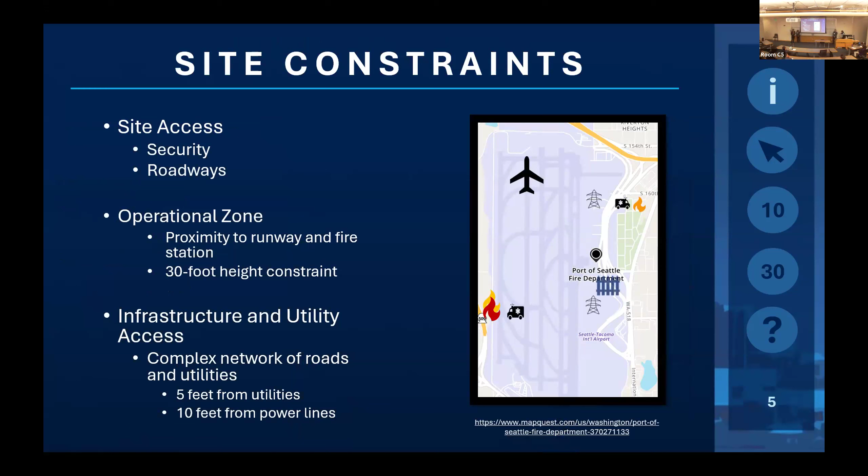The site constraints we have to think about during this remediation project include airplanes operating nearby. In addition, the Port of Seattle has to be able to get to the different fire stations, and there are lots of utilities in place. The proximity to the runway means there's a 30-foot height constraint on any construction equipment we'd bring on site. This image shows the complex network of utilities surrounding our site, which is important because during design we can't drill within 5 to 10 feet of utilities and power lines.

Our team evaluated 7 different remedial technologies, including granular activated carbon (GAC), ion exchange resin (IEX), foam fractionation, thermal treatment, electrochemical treatment, removal of contaminated soil, and colloidal activated carbon (CAC) injection. Of those 7 technologies, the first 6 are ex situ treatments, meaning the groundwater is taken out of the ground and treated, then either disposed of or reinjected — for our project we assumed reinjection. CAC is an in situ remedial alternative, meaning the groundwater is treated in place in the ground.

You can imagine that 7 technologies is quite a lot to evaluate in just 9 months, so the Port of Seattle advised us to make a preliminary selection matrix to narrow it down from 7 technologies to 3 for a 10% design, and ultimately one of those to a 30% design.

To do that, we used a disproportionate cost analysis (DCA) ranking criteria from the Washington State Ecology Feasibility Checklist. There are 7 criteria in that checklist; however, the Port asked us to look into 3 specifically: protectiveness, which covers human health and the environment, implementation, which covers technical and administrative feasibility, and cost. For the preliminary matrix, we did not cover cost, since we looked into that later in our 30% design matrix.

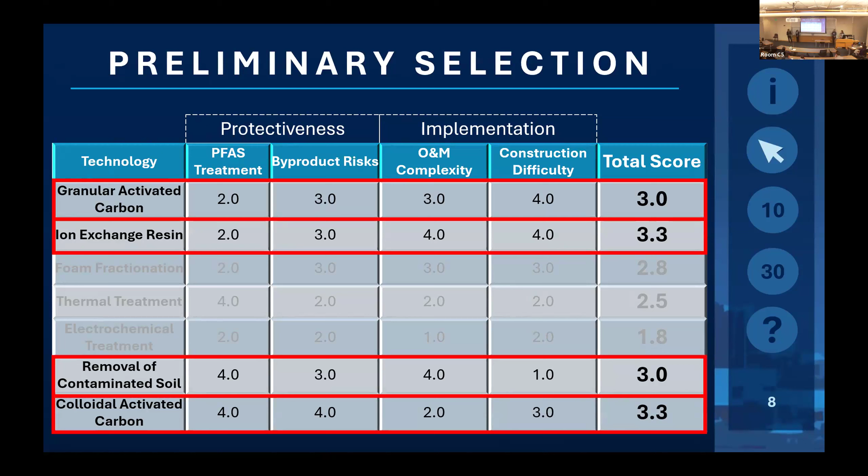However, from the site constraints mentioned earlier, we know that removal of contaminated soil is not a practical solution for our site. So once we removed that from the list, we were left with granular activated carbon, ion exchange resin, and colloidal activated carbon injection.

We began by doing a preliminary 2D model, and this is the estimated extent of that contamination. We were given 4 monitoring wells monitoring the contamination concentration, and we're focusing on 4 different types of PFAS - the ones that are most regulated and most known. The numbers in red recognize contaminations above the state action limits, so that's what we're targeting. Monitoring well 2 is where the discharge site was happening, so we used monitoring well 2 and the Doug Fox well to model a 2D plume.

This is the one for PFOS, which has the smallest plume, about 500 feet of the 1,000 feet. The red lining shows the ones above state action limits.

PFOA goes past the Doug Fox monitoring well, which will be the main one we're focusing on since this had the most contamination spread. The problem with this plume though is it doesn't show any contamination at monitoring well 1, which we know does have contamination, but we're using this to continue our selection process.

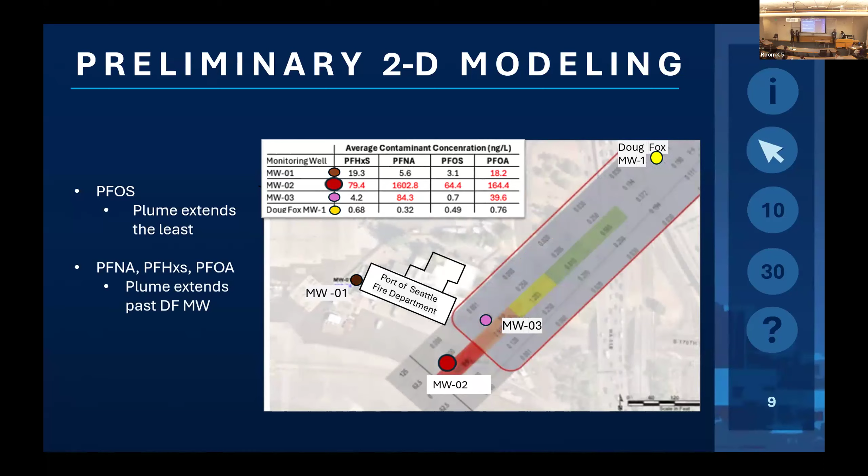So we use a 2D model to inform our 10% design calculations. As a reminder, both GAC and IEX are ex situ treatments - specifically pump and treat treatments, meaning the groundwater is pumped out and into a contactor filled with a specific media, in this case granular activated carbon or a strong base anion resin specially formulated for PFAS compounds.

The colloidal activated carbon is an in situ treatment, so in this case we would be injecting colloidal activated carbon directly into the groundwater.

We calculated our carbon utilization rate, which gave us a 7-month change interval between media, equating to about 7 tons of carbon per year needed. For IEX, we used a linear adsorption assumption, giving about a 14-month media change interval, equating to about 5 tons of resin needed per year.

For CAC, we used a down gradient plume capture, and from literature values of similar projects, we think it'll be about 30 years before reinjection would be needed, if needed at all. Our 2D model gave us a barrier length of about 250 feet needed.

We then looked at our 10% design costs, researching literature values from similarly sized projects and taking an average applied to our project. For GAC, we came in at about $18 million. For IEX, about $10 million, and for CAC, about $1 million.

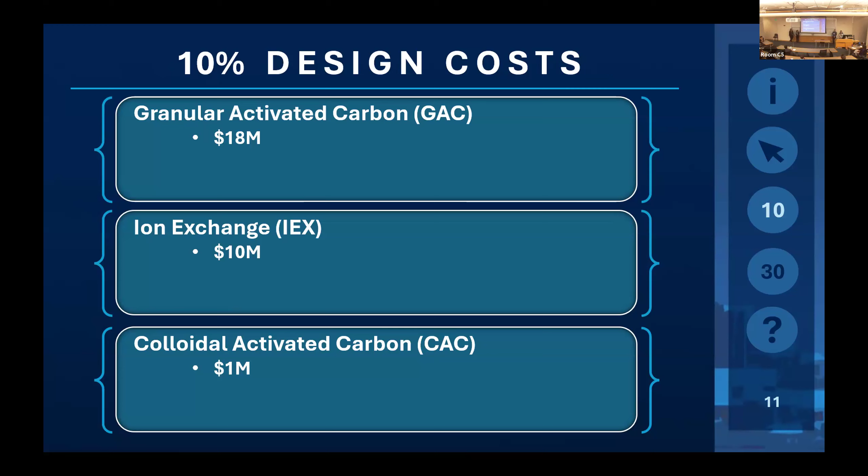We recognize that $1 million is quite low and not a realistic number. However, we're very confident it would be the lowest cost of the 3 designs. We then added a contingency to each design - for the 2 pump and treat options, a 40% contingency for pumping rate variability, and for the CAC option, a 20% contingency. We mostly used the Federal Remediation Technology Roundtable, or FRTR, but also some other literature values.

In this phase, our 4 major deliverables were a 3D model sensitivity analysis, creating a barrier field layout for CAC injections, developing a future monitoring plan, and providing a project cost estimate.

For our 30% design, we wanted a more accurate representation of our contaminant plumes, so we used MT3D and ModFlow 6 in the graphical interface ModelMuse to create an advection and dispersion model. The purpose was to generate a more accurate plume width, do temporal modeling to predict how the plume moves over time, and determine the extent that contaminants are above state action limits - all helping inform the amount of injection wells and their location.

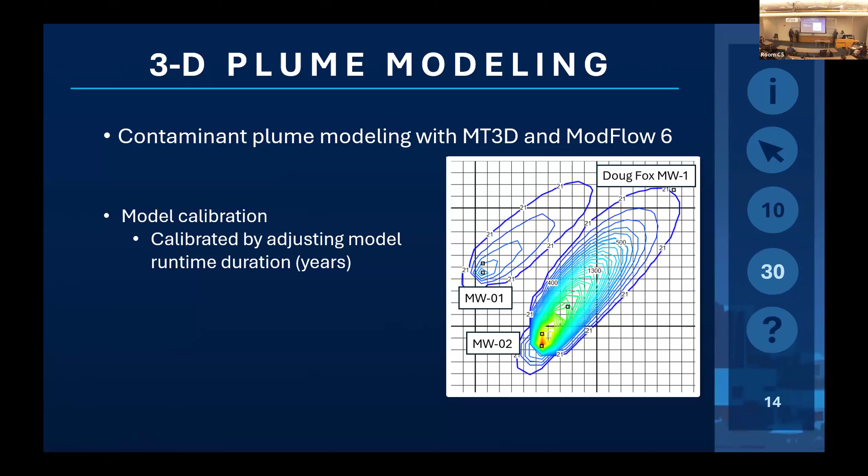After calibration, we conducted sensitivity analysis, and this is to determine what parameters, when changed, have the biggest impact on the model. To do this, we measured in the model the distance from Monitoring Well 2 to the state action level after adjusting a key parameter by plus or minus 25%, and compared this to the default model, where this distance was 602 feet. In doing analysis of the results, we found that the coefficient of dispersivity, which impacts how the soil interacts with the contaminant, and the hydraulic conductivity, which impacts how quickly water moves through the ground, had the highest impact on the model results.

The priority of our design is to contain areas that exceed state action levels. To do this, we integrated our 3D plume model with GIS to create a plume map where areas exceeding state action level are highlighted in red.

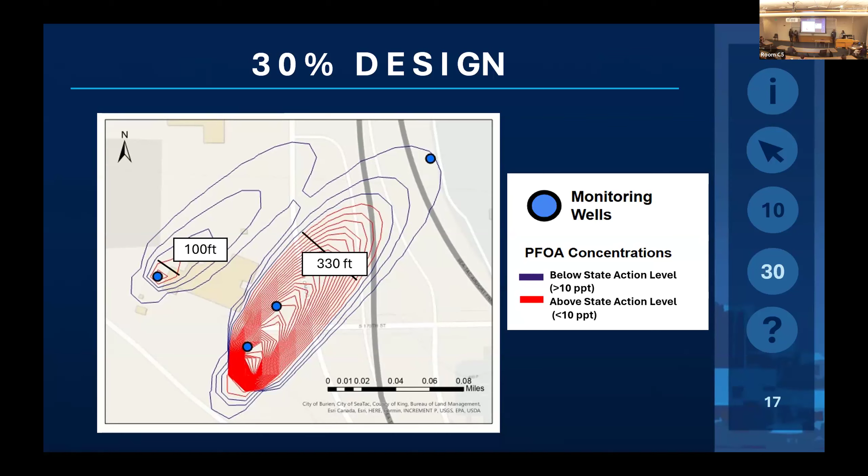We use this map of PFOA concentration specifically, as it is the compound that has the largest area exceeding state action levels. At our small plume, the width was about 100 feet, while at the large plume, we found the width to be 330 feet.

As a refresher, CAC is an in-situ technology, meaning it treats groundwater within the soil. At our site specifically, we use CAC technology to contain the spread of PFAS. A permeable reactive barrier is formed by tight rows of colloidal activated carbon injections. These adsorb PFAS as the groundwater moves through it, preventing further migration off-site. At our site, these barriers will be installed down gradient of the plume's exceeding state action level to prevent further migration.

At the large plume, this requires 132 injection points, while at the small plume, this requires 40 injection points. In addition to just planning the CAC injection field layout, we also developed a future monitoring plan where we place monitoring wells to measure the effectiveness of our treatment over time. This requires the installation of monitoring wells placed before, inside, and after reacting with our barrier.

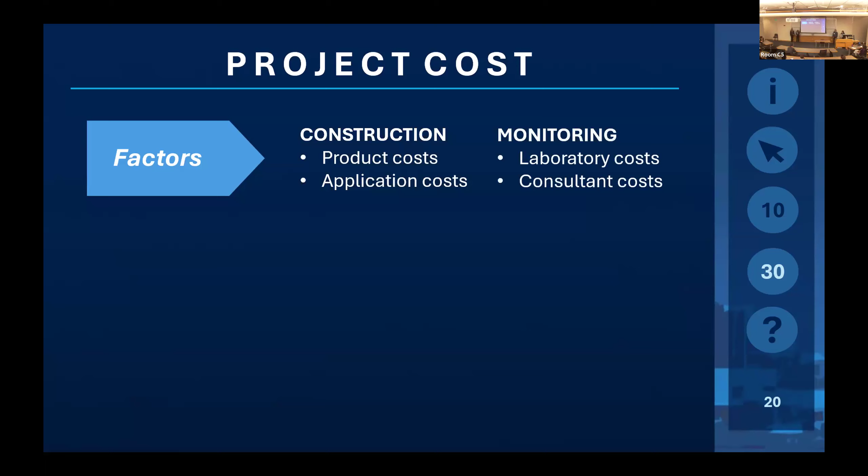While determining our final project cost estimates, we factored in capital construction costs, which are broken into product and application costs, as well as monitoring costs, which include laboratory and consultant costs. The design assumptions that we used to calculate this final cost value were a total barrier length of 430 feet between the two barriers. This requires a little over 160,000 pounds of injected carbon, and this takes place over a treatment period of 15 years, where 8 monitoring wells are required and measured twice per year.

After adding a 30% contingency to our final cost, we ended up with a net present value of $3.9 million.

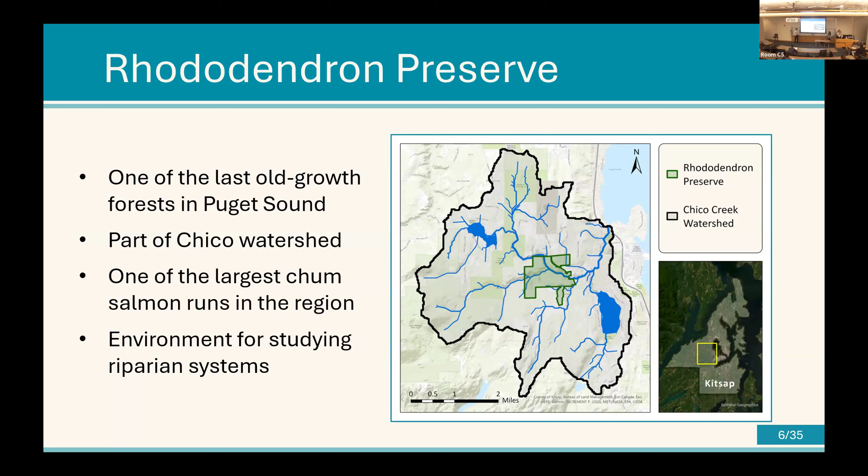To go a bit more into this, a riparian ecosystem is essentially a transition between an aquatic and terrestrial ecosystem. These are very important as they help with things like supporting biodiversity, regulating nutrient cycles, and even water quality. Adjacent to these is the stream spawning habitat, which is where salmon lay their eggs, making these very important for supporting the salmon populations within the Puget Sound.

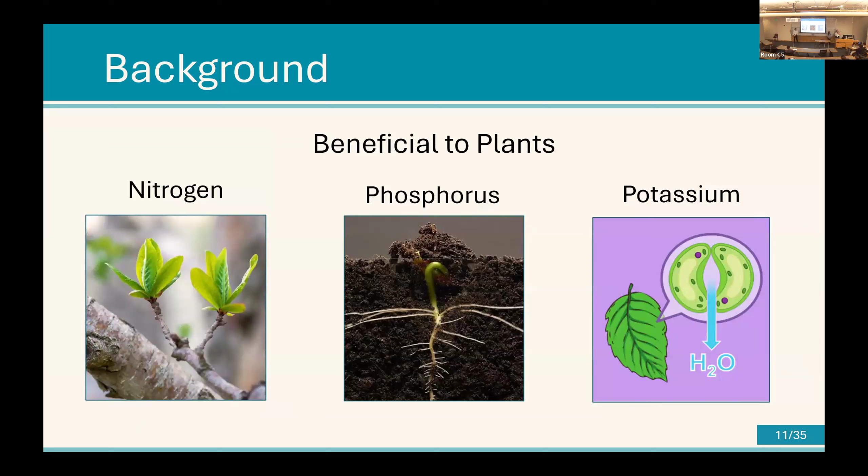So we want to ask the question: within our preserve, how do water and soil nutrients interact within spawning ecosystems? We expect that an increase in water nutrients will lead to an increase in soil nutrients, which will then benefit plant growth and abundance.

At each site, we selected 30-meter transects on either side of the stream along which we collected our data. Water samples were collected from the center of the stream, while soil and plant data were collected every 10 meters along the transects.

At each sampling point, we created 2x2 meter quadrants at which we collected our vegetation data. We recorded the species present as well as the abundance of each.

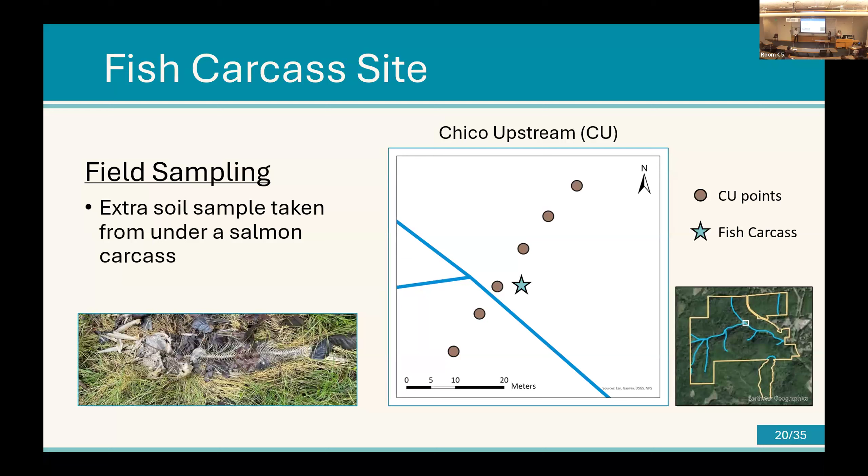Finally, we took back some samples for nutrient testing that we sent to MySoil, a professional soil testing company. We collected one additional soil sample from about 6 inches beneath a decomposed salmon carcass for later reference. This salmon carcass we sampled was found really close to our Chico upstream site.

In a similar fashion to the soil data, we also collected temperature and pH data for the water, to make comparisons between the site and adjacent transects. We also collected velocity, dissolved oxygen, and turbidity data. Velocity helps us determine the size and extent of sediment movement within the streams. Dissolved oxygen is a good metric for determining the viability of those streams for salmon populations. Turbidity is the suspended solids within that water.

Now I'll go into a little more depth on the nutrient testing we conducted at the lab. We used Hach spectrophotometric measurement kits, which come with pre-dosed vials of reagents. They're subjected to an incubation period and go through chemical digestion, after which we're able to use them to determine our nitrogen and phosphorus concentrations.

Moving on to our results, just a reminder: the question we wanted to answer was how do soil and water nutrients interact within spawning ecosystems?

Before going into depth, as an overview, whenever we plot things against our different sites, we broke this down into two categories: differences in stream are indicated by colors, and differences in stream position, upstream versus downstream, are indicated by differences in patterns.

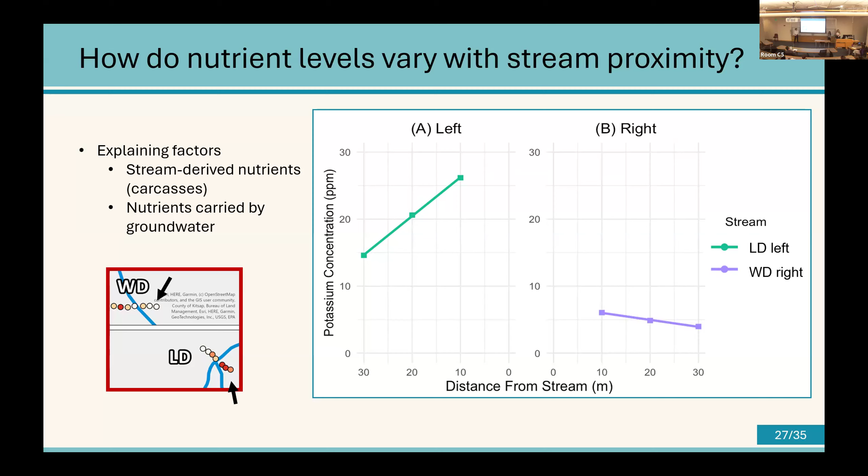Additionally, different nutrients have varying lifespans within the soil. For example, nitrogen-based compounds tend to be more readily available for plant uptake. Potassium's role in plant water regulation could also play a part, benefiting the uptake of other nutrients. The last thing we wanted to consider was the timing of our sample collection.

We collected this data in late winter, while the majority of plant growth occurs in spring and summer. So it's likely that the data we see here might be more reflective of plant growth trends for the coming season rather than what we observed in the field.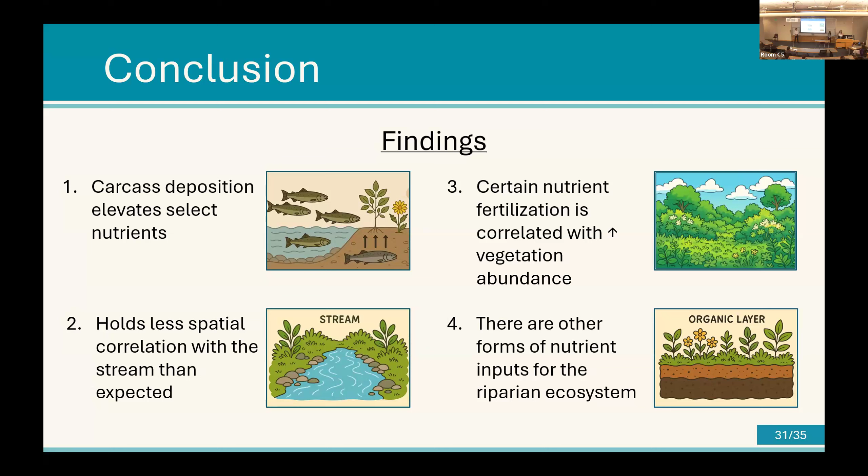Although less mobile, they still have the ability to affect the vegetation community, where an increase in potassium concentration was correlated with an increase in vegetation abundance. Lastly, while salmon spawning as a nutrient input is very important, it might not be the only factor within our system, so we need to consider other factors such as the organic layer.

Finally, we have a few recommendations for any future studies conducted in this area. The first is to increase monitoring frequency to fill in any temporal gaps we might have missed, such as summer and late spring months. We'd also like to see an expanded hydrological analysis to include water table data as well as topographic mapping.

Then, to conduct a marine isotope analysis, which would allow us to determine whether or not those increased nutrient concentrations within the soil are actually derived from the salmon spawning there. And finally, we'd like to see a refined soil testing procedure as well as lab work.

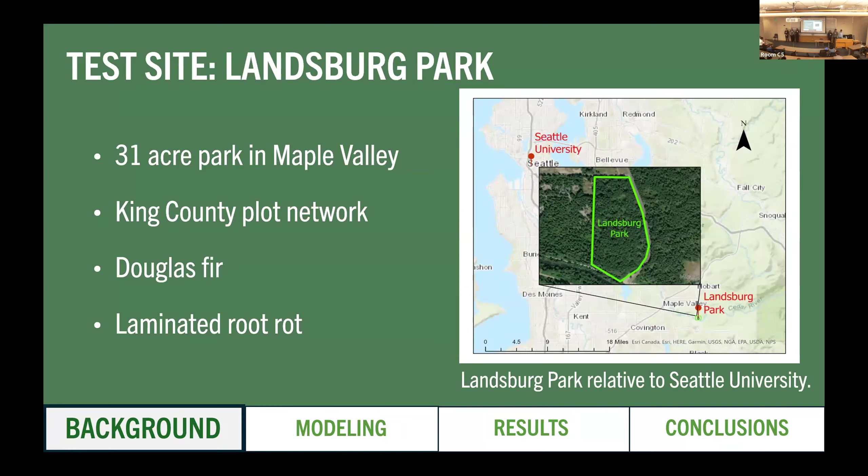For our project, we used a test site, Landsburg Park, a 31-acre forest in Maple Valley, Washington, with an extensive plot network maintained by King County. It's comprised of densely packed Douglas fir and is impacted by laminated root rot, a native fungus that spreads through contact between infected trees.

Our project began with data collection using ground-based data from King County's plot surveys, as well as aerial-based data collected via a series of drone surveys using different combinations of flight parameters. Next, we attempted to automate steps in our process so the user can upload a series of 2D images, generate models such as canopy height and tree approximate object models, and extract relevant ecological metrics in a time-efficient manner.

Finally, we performed accuracy and efficiency analyses to determine the overall accuracy of our models using the different flight parameters. Additionally, we used derived and ground-based metrics, comparing metrics such as basal area, diameter at breast height, and biomass to determine the overall accuracy of aerial-based surveys.

Moving on to modeling, the first step before we flew the drone was to set ground control points, or GCPs, which are physical markers that need to be seen by the drone while it's in flight. We placed these throughout the forest and along its perimeter, and once placed, we took the coordinates using a high quality GPS.

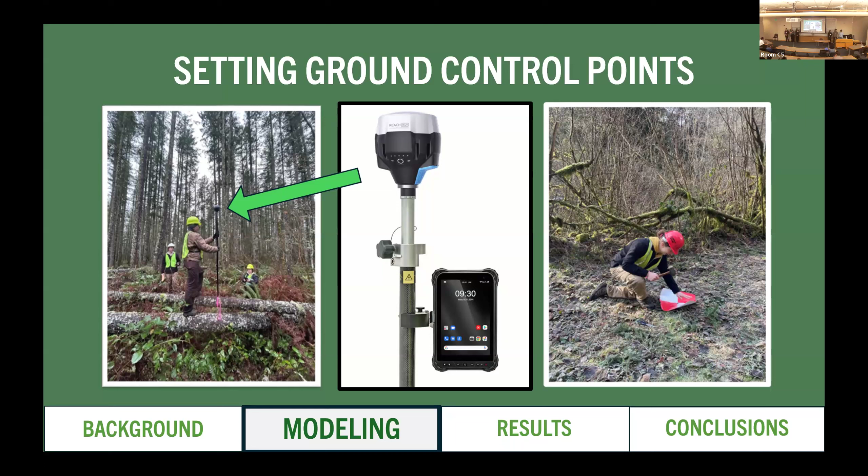We used a real-time kinematic, or RTK, GPS for this. Once we had these coordinates, we input them into the software we used to ensure that our LiDAR-based digital terrain model and our digital surface model were correctly aligned.

To answer our first question of what are the ideal flight parameters, we tested between two different flight parameters: image altitude and image overlap. For altitude, we tested 300 feet versus 400 feet, and for image overlap, we tested 70% versus 90%. We kept our drone speed at 11 miles per hour and our capture angle at -70 degrees. There are many different combinations of these parameters that can be used, but we chose these based on our literature review and after looking at King County's ground data.

So in order to automate our analysis, we developed a 3-stage pipeline in which we intake our aerial image set, then pre-process it by removing blur as well as noise to make the images sharper. We then reduced the resolution as well, to ensure a standardized format to utilize in our next stage of 3D point cloud generation.

We utilize the WebODM software for this, which creates our point cloud, as well as a digital surface model and a digital terrain model. Utilizing these two, we can create a canopy height model, which is a key point we'll use to find out our analysis for the gaps, as well as the overall forest health.

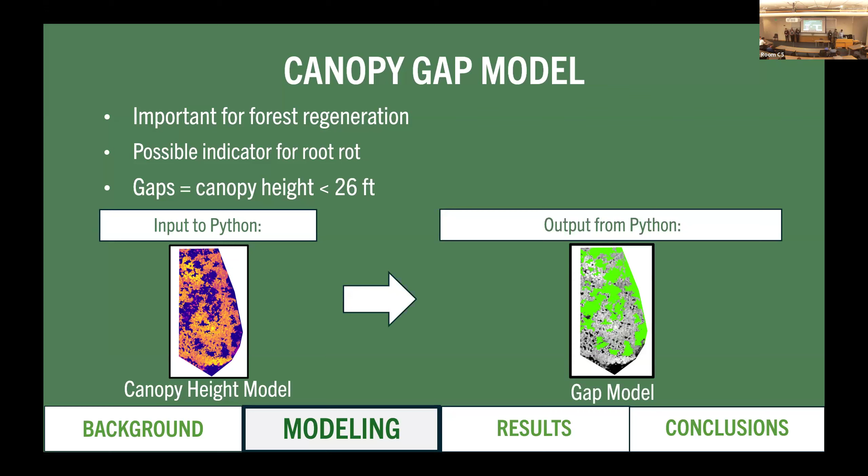Once we have our canopy height models, we use this to make our tree approximate object models. We make this model because we fly our drones to the top of the canopy, and because of that, in our images there's going to be a lot of smaller and subordinate trees hidden behind bigger, dominant trees. So instead of trying to segment these trees individually, we try to segment them as clusters or clumps of trees to give us a more accurate result.

To do this, we use an algorithm given to us by one of our sponsors, Brian Fuentes. We simply use our generated canopy height models, input that into the algorithm in RStudio, and that gives us our TAO models as an output.

Afterward, we have in-house results where we can quickly view what's going on, change the color map, meaning the coloration of the key map we're working with, as well as a text file of the gap metrics, like the average area and everything, along with a visual representation of what the gaps look like.

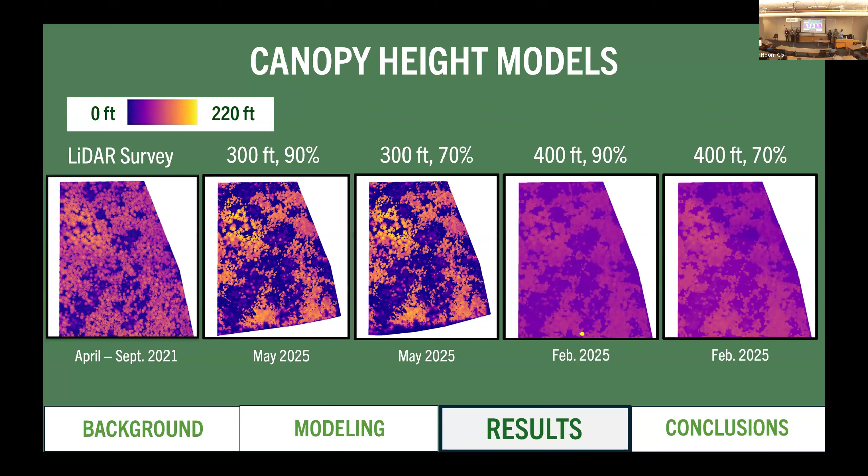Next, we want to highlight the LiDAR survey in comparison to the 300-foot 90% image overlap canopy height model. Overall, we found a change in canopy height over time. The LiDAR survey produced a maximum canopy height of 186 feet, versus our 300-foot altitude survey, which produced a model with a max height of 219 feet.

This may be due to the LiDAR misdetecting the tops of the trees, whereas our drone survey was able to capture the tops of the trees. However, Douglas fir have a typical growth rate between 1 to 3 feet per year, so some of this difference in elevation may be due to tree growth over time.

We found that most pixels have an elevation difference between 0 to 10 feet, with an average difference of 2.1 feet. Overall, this indicates that there was not a significant difference between the canopy height models generated using 90 and 70% image overlap, suggesting that image overlap of 70% could be used and could potentially still provide reliable results.

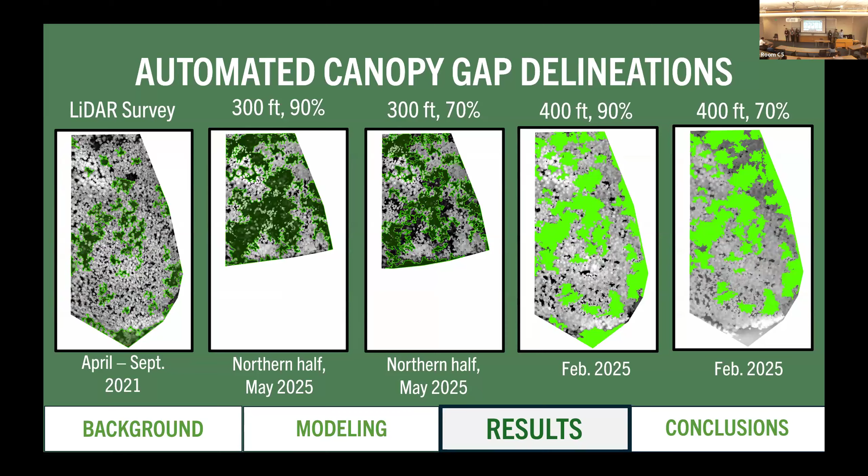Here are all the models with the gaps highlighted in green. To your left, you have the LiDAR survey. To the far right, you have both 400-foot flights, which look very similar regardless of the overlap used. However, the same thing can't be said for the 300-foot flights, which is something I'll get into next.

Looking more closely at the 300-foot at 90%, you can see that there's an overclassification of the forest, whereas the 70% actually underclassified the forest. One of the reasons we believe this happened is due to the drone flight. When we fly lower to the canopy, we have increased resolution, overall making the 300-foot flights more sensitive to our height threshold.

Finally, comparing the LiDAR survey to our 400-foot survey at 90% overlap, we chose to compare these two because we felt they gave the most accurate representation of gap change over time. Over the past 4 years, the gaps have expanded, increasing from 18 to 35%. In addition, some small individual gaps in the LiDAR survey have been merged together to create larger gaps in our survey. This is a possible indicator of root rot, or since our survey was conducted in February, some of the understory vegetation may have fallen off, affecting our results.

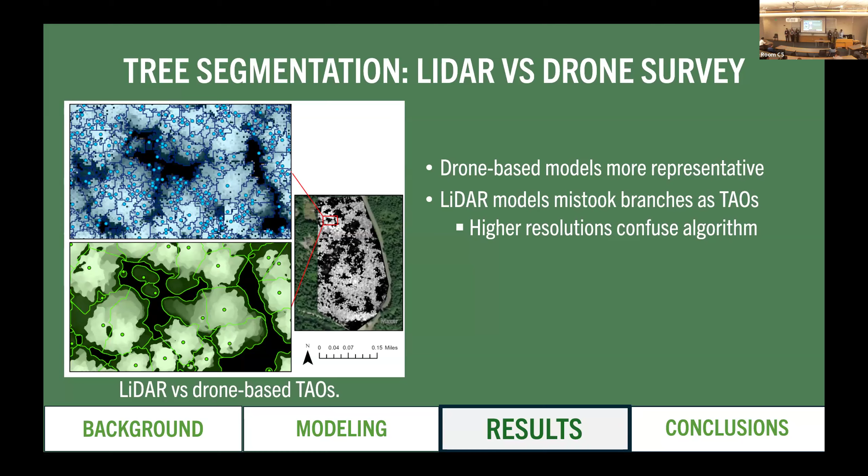With our tree approximate objects, we were able to derive forest metrics. We started by finding correlations between measured tree height and other forest properties such as diameter at breast height, basal area, and biomass, using King County's plot inventory.

Now to answer the project questions mentioned earlier, the first being: what are the ideal flight parameters? We found that flying 100 feet above the canopy, or at an altitude of 300 feet, gave the best representation of our forest. For image overlap, we found that decreasing this allowed us to decrease flight times and also the noise in our images, which helps increase the accuracy of our models.

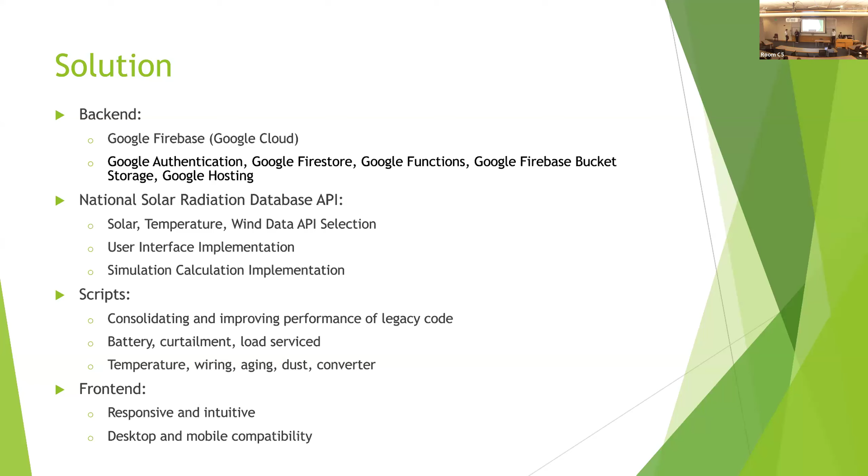For the front end, we essentially had to build it from scratch. Our sponsor required that it was responsive and user intuitive, especially for non-technical users, so people like you and me. They also required that it was desktop and mobile compatible, which is especially useful for when users are using it on-site during microgrid installations. Now I'll pass it back to Josh to talk about future implementation.

So I'll talk about the future implementations. These are things that we missed and couldn't get to, but that we hope the next group works on and implements into our application.

Starting with the back end, we would like more security features and project sharing functionality. Currently, not everything is shared when you share the project with someone else. Then there's improved load input querying. Right now there are 24 different inputs for each hour of the day, and we would like to improve that and make it more user-friendly, because inputting 24 different things is not very fun.

And then for the front end, loading indicators for the simulation, just to see when it will be done running. And also strengthening mobile responsiveness.

Right now it works on mobile, but it's not amazing, so we'd like to improve that. And then for the scripts, cycle charging, and optimizing energy for different demand scenarios. And then finally, for the API, allowing for user selection of data.

If the user wants to specify a different region, right now the API only pulls from weather data in Africa. So if the user wants to pull from a different location, they should be able to do that. And then expanding the API range, similar to what I just talked about.

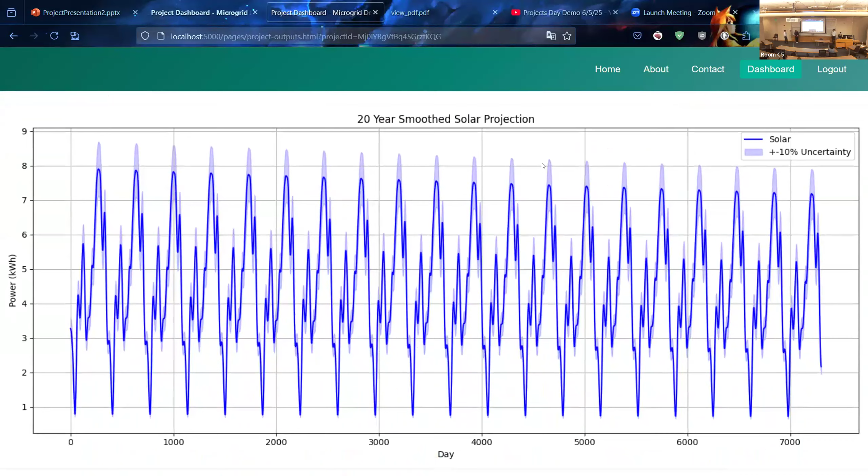So I did click that. It's going to take a minute to run, so I'll walk you through the graphs first. When you run it, we'll output the solar generation over one year, as well as some heat maps - this is a nice one of the average daily solar power generation by month and day. Here's a 20-year projection of that solar output, and you can see a slight degradation due to losses. We'll get that finished, we can go over that later.

Here's a load profile, being read in just to save us time. Okay, and load growth and wind projections. So the output plots, you can print them to PDF as well to see those graphs. So here's the output project graphs. And that is the Microgrid toolkit.

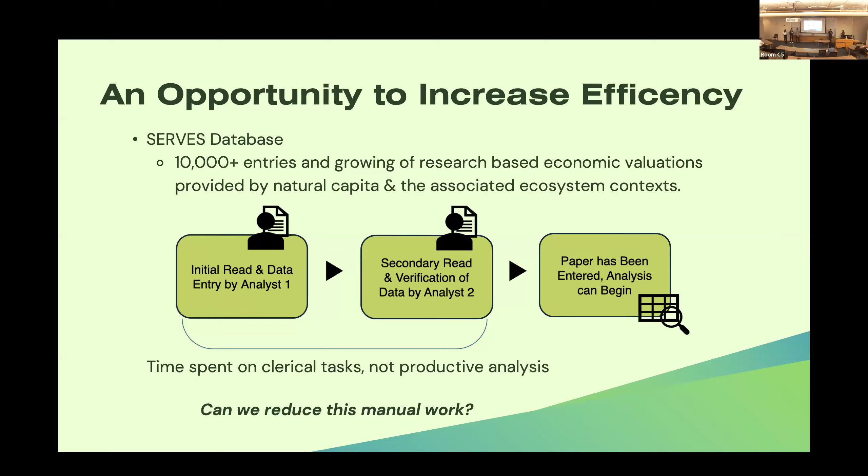And to go further into the development and design for our program, I will be handing it off to Liam. Yeah, thank you, Michael. So here's our, we identified those components as our minimum viable product. First and foremost, we wanted to utilize an AI model to do the hard work for us, as Michael mentioned before, and also we wanted to have a user-friendly UI.

Ultimately, most importantly, we wanted to generate a CSV file, which can then be uploaded to the database. And we wanted to have the data analysis, which evaluates model and system performance, and also wanted to have the user manual and documentation. Moving on to our solution to our MVP.

First, we took the large language model as our choice of AI, more specifically GPT 4.1. Using prompt engineering, we scan the research paper and do the data extraction into a spreadsheet. We also developed a data pipeline, which includes a file management system and an AI module. We hide those complexities and have developed the UI, which will then be deployed onto our staff members' desktop.

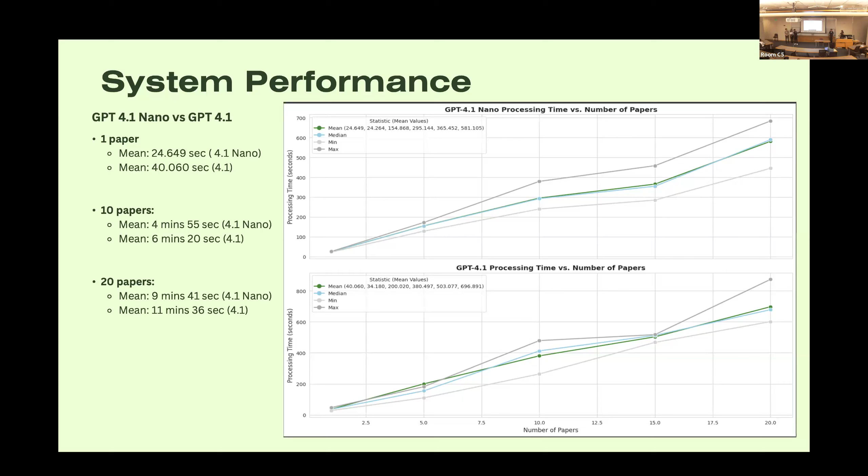In the next slide, equally important is that we understand the system load capacity. For this experiment, we only used GPT 4.1, and this model can handle up to 1 million tokens, or 1 million units of text, in one pass to the model. However, this might suggest that the system can handle up to 40 to 60 papers. However, there's a rate limit of 30,000 units of text that can be sent to the model in one pass.

So our recommendation would be to process papers in batches of, let's say, less than 10 papers to ensure optimal performance and avoid the input being cut off. To summarize, I think this is going to be a significant gain for our clients, and the goal of this type of testing is to help them define operational boundaries and guide efficient usage.

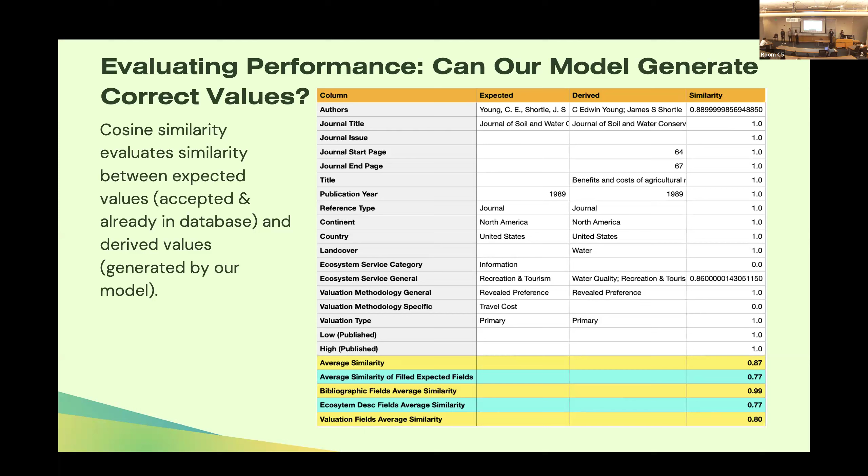So overall, for all of the papers that we tested, between expected and derived values, we had a 92% accuracy score for bibliographic data. For ecosystem descriptor fields, we had a 64% accuracy, and for valuation fields, we had a 60% accuracy rate.

With that in mind, from all the progress we've made, I'd like to talk about the milestones we've achieved from our MVP. Firstly, we managed to create an AI-powered end-to-end data extractor tool paired with a friendly user interface where users can upload papers, view its progress, and also view the output produced by our AI backend. The output is a filled Excel sheet matching the template provided to us, compatible for import to the SERVES database.

For efficiency, we also conducted an analysis of the model and system performance testing and system load testing. And finally, for ease of transition for our final deployed product, we also provided a user guide.

We've also identified key avenues our system has the potential to develop into. Firstly, we could provide a backup AI model. Currently our system is set up to only support OpenAI, but we could also introduce other providers such as Meta's Llama model. Or we could also allow users to parse different types of documents other than PDFs, such as a Microsoft Word doc, or other types of data, such as graphs or images.